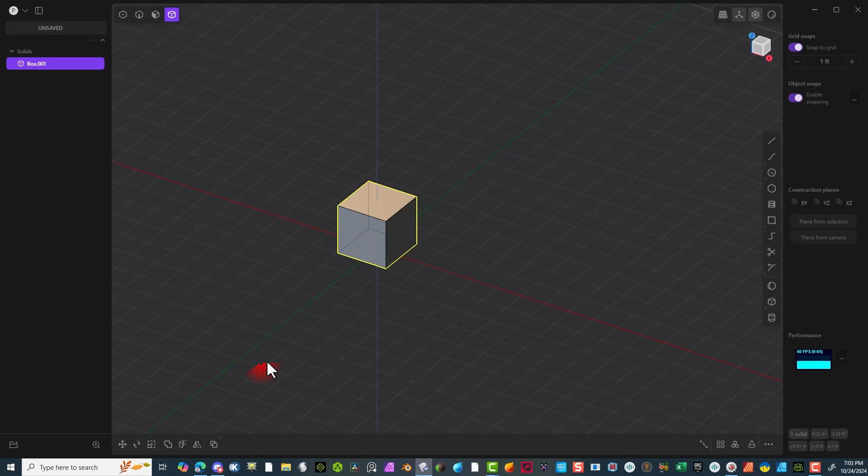First of all, I'm going to select this cube here and delete it. Don't need this. I'm going to start off with a circle. I'm going to bring this out, and we're going to snap it to 2. If you don't have it snapped on, that's fine. You can hit tab, then enter, and enter the 2. And that's basically what I start off with, 2 feet.

Then I'm going to extrude this upward. I'm going to hit the face selection tool and just bring this up. This I'm going to put on the snaps. I'm going to bring this up like 4 sections, basically. I'm going to hit the OK button to accept it.

Then I'm going to start working on the top piece here. Let me zoom in a little bit. I'm going to select the line tool, Shift plus D to make a copy of it. Then I'm going to bring this up, like 1 section, 1 snap, pull it up to the top here. I'm going to also hit G and bring it up with the Shift D. So I made a copy of this basically. Then I'm going to take the snaps off and bring it a little closer, almost halfway between the foot.

I'm going to select these 2 faces and hit the L key to loft them together. Then I'm going to actually scale this up with S and S. I'm going to go to the actual front view here, and bring this right down to the side here with the G key. Using the F key to hit the actual center of this object to bring it into the other object so it lines up properly. I'm going to bring it in a little bit farther so it's actually into this other object.

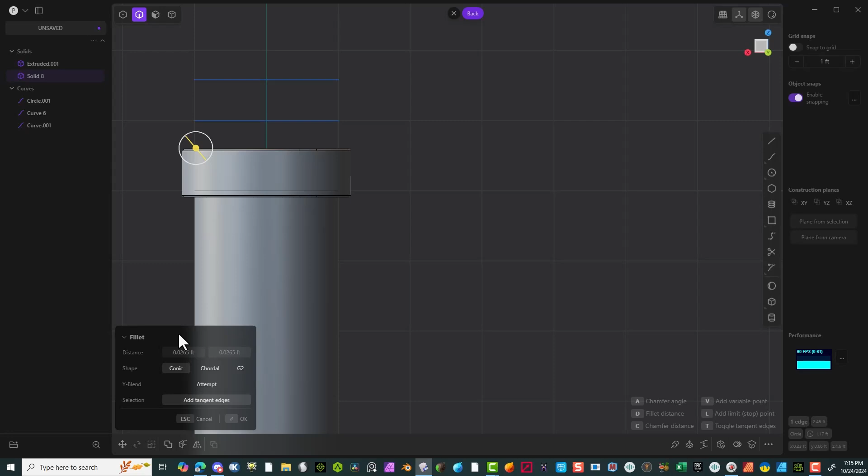Let's select this edge here and I'll pull this up with the fillet. Hit the OK button to accept. Same thing on the top here. Not too much, just enough to have a little bit of curvature. I'm going to cancel that and pull this a little bit more. I think it'd be nicer to have a smoother transition there. Like that would be good. Okay, hit the OK button.

Now I'm going to select these pieces around with the Alt key and the top piece. I'm hitting Shift D to make a copy of this. I use this to help add a little bit of a design on the top of this object. So I can select these 2 here with the line tool and delete those. Now that I have this here, I'm going to actually do some work on it.

I'm going to hit the actual circle, bring it out, something like about there. I want to cut the center of this out. So select this piece here and then hit the cutter, select it and cut. Hit OK. Now we can just delete that little piece there on the top. So that's done. Let's go and select the line tool now and delete that. There we go. Now I'm going to use this part here to make it look a little different.

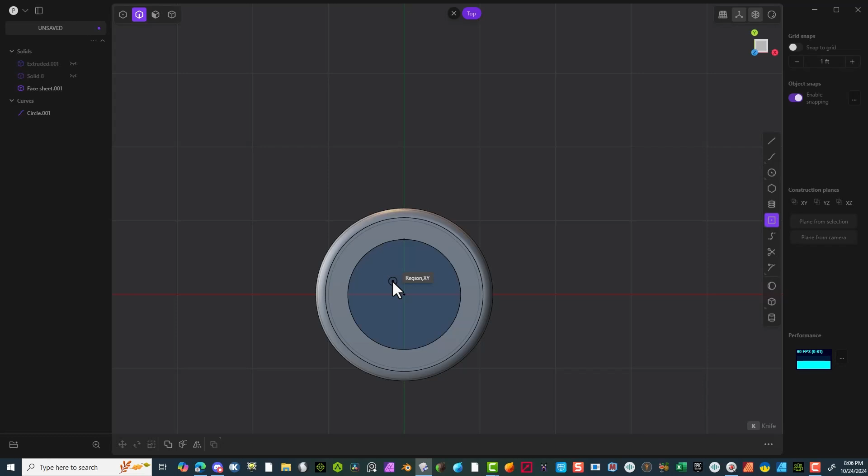Just to give some variations here. So go to the side view, now the top view. I decided to use the actual rectangle tool. Pull this out from the center out. I'm going to use this to help cut this section here. I'm going to make sure I hit the center of that area. I'm going to bring this down to like, I think around 3. That way I can get some variations of these parts.

So now I've done that, I'm going to select the actual object itself. And then when I use the cutter, I'm going to select each of these. There's basically 3 of them to select. And then hit the OK button. Cool.

Now we can actually select all these 6 sections here and delete them. And then I can select these lines with the line tool. Select each of these, and let's delete those.

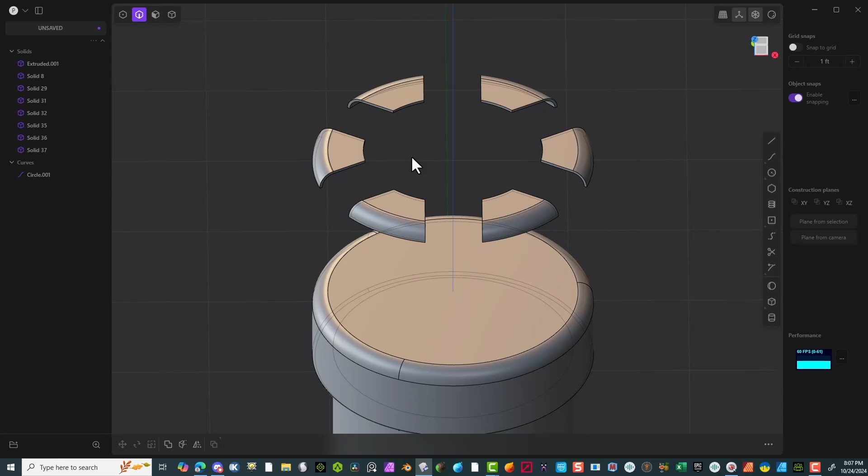Cool, so basically got 6 pieces. Now that I've got those cut out and formed, I'm going to bring these down with the G key. But first I'm going to create some smaller holes on top of each of these parts. I centered it on this part and brought it in. I'm going to scale this down a little bit, I think it's a little too big. I'm going to try to drive around 3 of these cylinders on each section.

To do that, I'm going to use a radial array and select the center here. Of course it's way too little, 3 here, but if I start bringing this up I get to a point where I actually have 3 per section. So I went with 36, that way each section has basically 3. And then I hit OK.

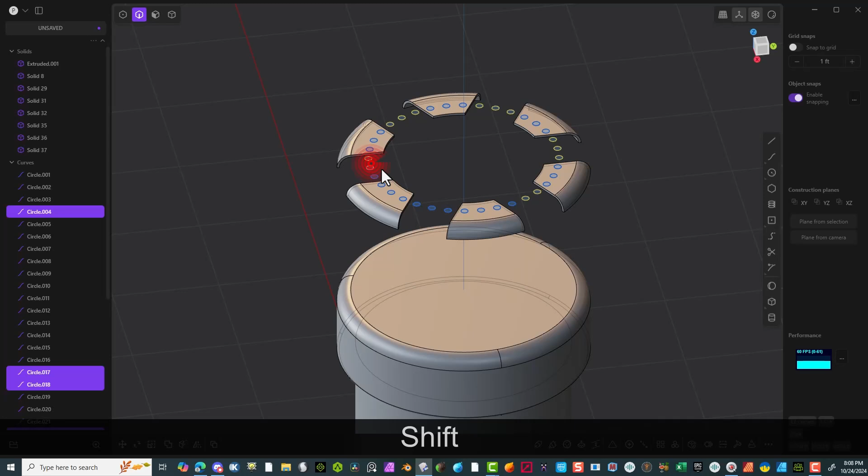Now I can go ahead and select these ones I don't need, holding the Shift key with the left mouse button, and just start selecting all these, trying to get away so I don't select other things. And these as well, and that one, and delete those. Just going to select these other ones here, delete those. And then you got one more on the side here, and delete. All right, cool.

So now I'm going to select each of these parts, and then start using the actual cutters. But first I'm going to select each of these sections, and pull out each one so I can cut straight out of these parts. So once I do that, hit the E key, and drive this downward, just like that. Hit OK.

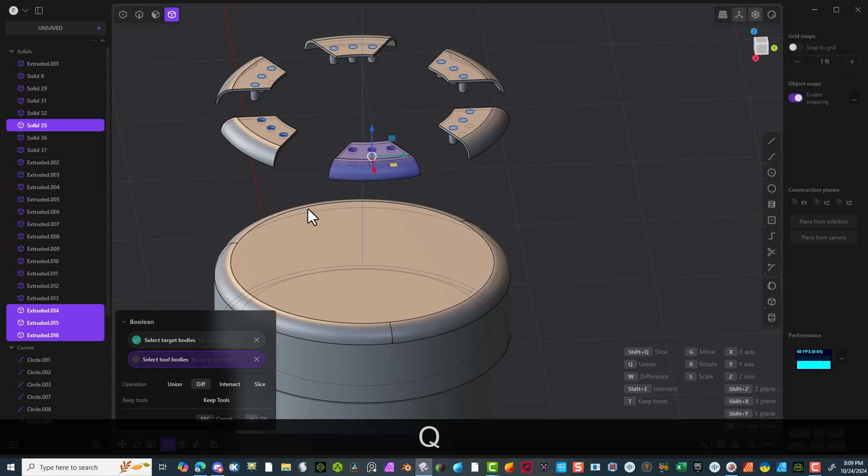And I select the object selection mode here. Select each of these, and then select the 3, and basically hit Q. We're going to do that for each of these sections here. So select the main section, the 3 cylinders, and hit Q, and keep going through the process all the way around each of these sections.

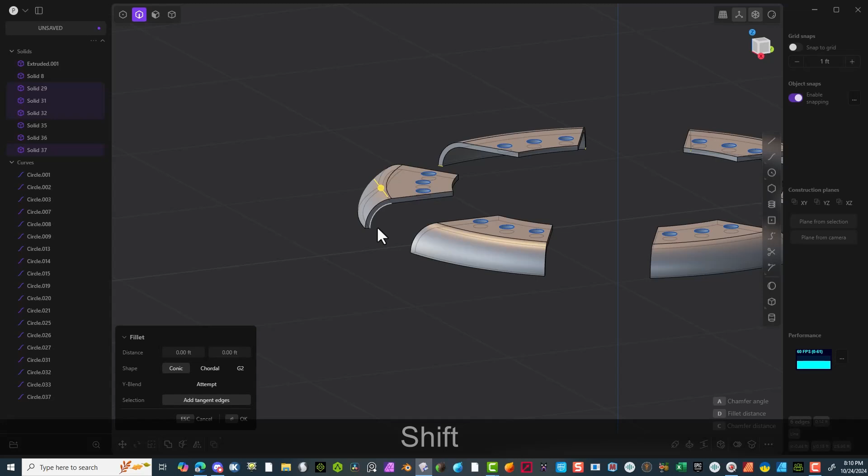First, I want to go in and add a little bit of fillet on each of these corners. So let's select each of these. There's basically 4 per section, each corner has an area I've got to add in a little bit of an edge there. So let's go and get each of these on the bottom first, just trying to focus on the bottom, and then I'll work on the top section as well.

All right, so I got all those selected now, and now would hit the top ones. Just trying to continue to focus and drive this changes where they are needed. So I never really want anything too sharp. Actually, in my modeling, I like to have a little bit of curvature on everything so it looks better and reads better. So I got those all selected.

I'm going to go ahead and pull on the yellow circle, just the fillet, and pull this out. One good thing about this program, it automatically has it set up for you in most cases. If it's not there, you just have to hit the B key.

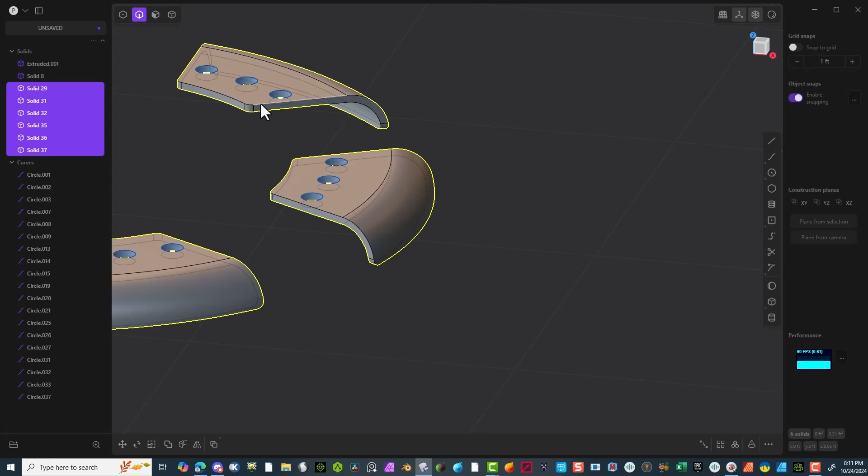All right, so now I'm going to select these lines like I did those other sections. I'm going to do each of these as well, so I'll go around the whole thing and select each of these sections. Let's select the bottom as well, so that way I could do one fillet for the whole thing. Let's make sure I get each of them.

And then let's pull it out, a little bit on the plus, like 0.004. Cool, all right, so now I got this selected, just going to bring those down into the space, and we're going to be a little bit above the existing part just to give some variation. Zoom in a little bit, see what it looks like. Yeah, I think that looks good.

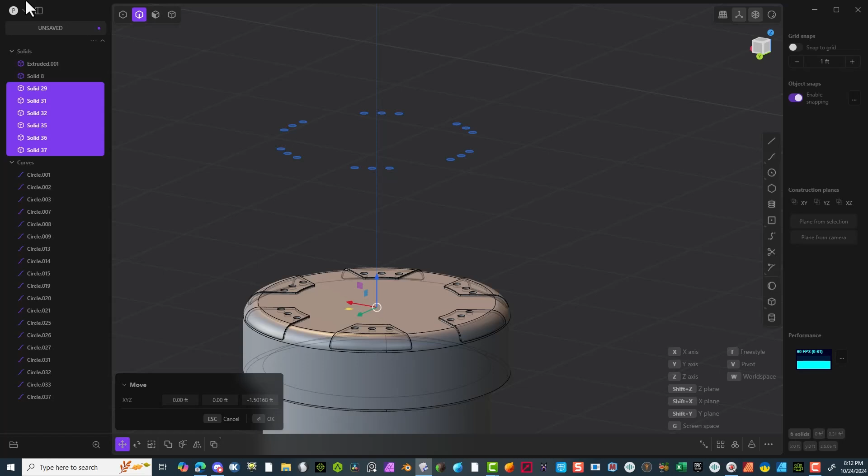I'm going to hit the OK button now and select these and delete them. Don't need those anymore.

Now I'm going to pull out a circle on the top here, and get it closer to the inner pieces. Basically creating a shape on the top. I'm going to hit Shift D on that and bring it up, and also scale this down with S.

I'm going to use the curvature spline tool and go to the side view to add a side rotated angle. But first I'm going to hide all this stuff so I can see what I'm doing.

Go to the side, select the top, point there, bring this down, and make sure I hit the tab key. The tab key will help drive this line so it looks better, it's easier to control. So let's bring it down and add a few more lines here.

Basically I'm going to do a revolve on this section here, just to give it some nice looks. I'll go a little bit out, then bring it back in, get a little closer, a little more control, and then back to the point. There we go.

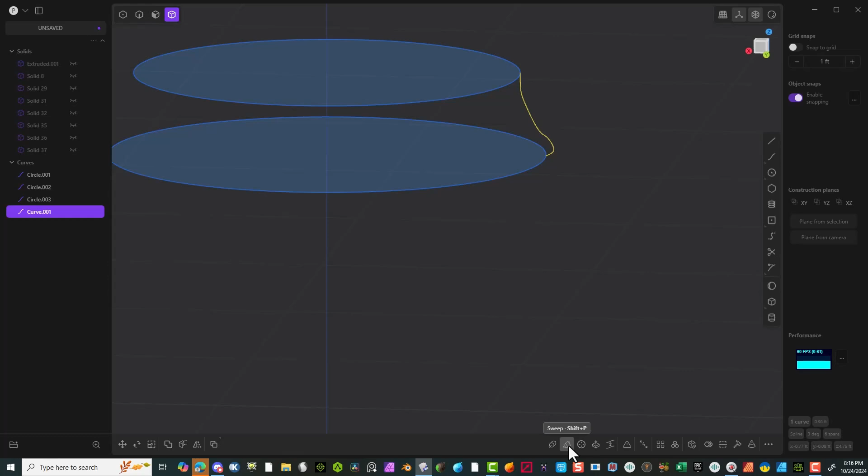Now it's really easy to go in there and select those points if you need to adjust anything. I'm good with the shape, so I'm going to hit the revolve, hit the very center of the space, and pull it upward, exactly straight up, so I get the shape I want.

I'm going to select this section here, the line, and delete it, and the one on the bottom. So we'll select the top line, hit the patch tool, hit OK, and the same on the bottom, hit the patch. All right, that's done.

Now we have an actual solid. We can pull this out a little bit with a fillet to make a nice rounded top piece, and now we can use the rectangle tool to pull this out.

All right, that looks good there. I'm actually going to do a fillet on these, take off the actual snaps, and of course add to the plus to make it rounded, something like that.

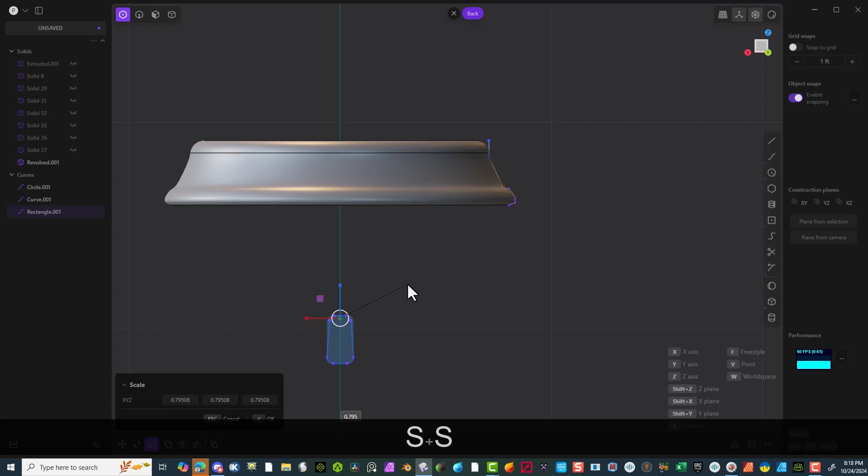Okay, I'm going to select these bottom sections and hit the G key and move it down with the blue arrow, then say OK. Then I'm going to take these sections on top and scale them in with the S key, just to give some different variations in the actual design.

Okay, select the line tool and move this up into the space, right about there. Then hit OK, and scale down a little bit so it fits better. Now it's in the center, so we're going to move this out. Again hit the G key and move it out. About right there looks good.

Hit the OK button, now select the face tool. I'm going to select that section there, and we're going to extrude this into the space, go all the way through. Now let's see. Let's select this line here and delete it.

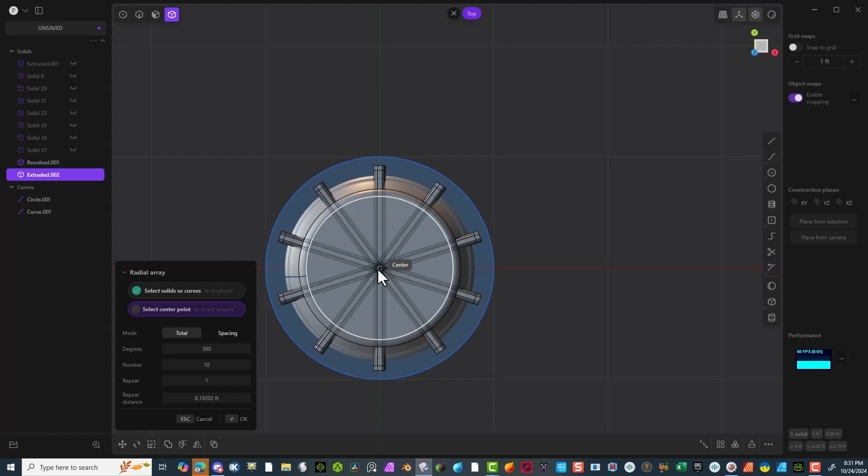All right, let's select this again. Top view, radial array. I'm going to go down to 5 sections, but it's actually really 10. Perfect.

Now select the main one and then these other sections here, and we're going to hit the Q key, then hit OK. That way it's nice and cut through.

All right, I'm on the top view now. I'm going to bring out a disk, right about there. I'm going to Shift D this and bring it up. Hit the OK button, of course. And we're going to select the 2 faces here and hit L for loft. Then hit OK, and just delete these 2 pieces, these 2 lines.

Now we can select the object and move it in, down into the space, then hit OK. Again hit Q, Shift Q, so I can combine them into one. Now I'm going to select the top piece and delete it, of course.

Select the line tool right here and basically do a fillet here. Hit OK, and then one right here as well.

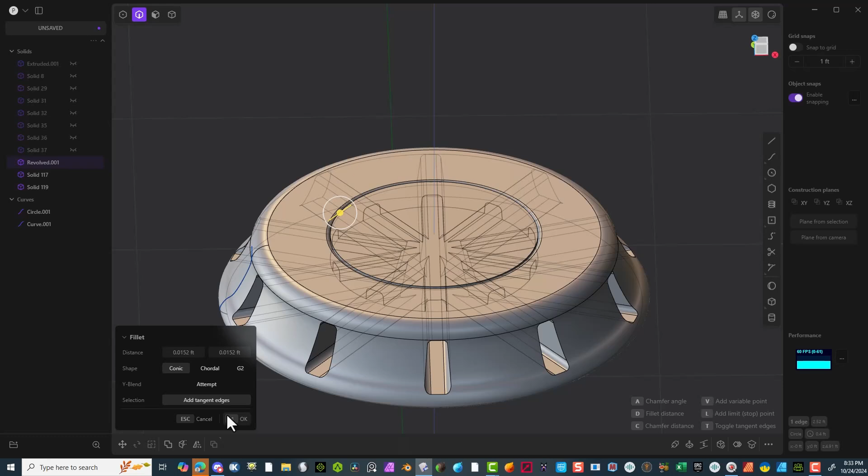Let's select the top here and actually pull it out with the E key upward, and then the line tool. And we'll do a fillet on that as well. Select each of these round sections here, all the way around. All right, last one. Great, now let's go and pull this out on the plus.

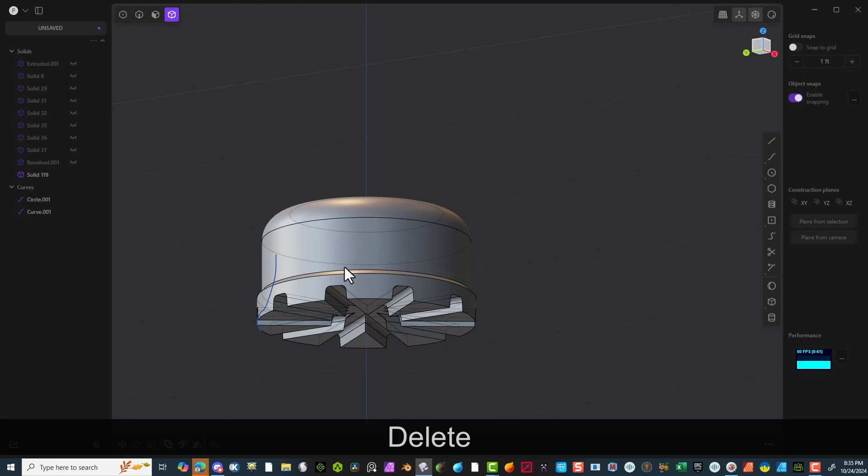Can't do a lot here because that line is so close. Just gonna type it in, 0.001. That took, so we're gonna hit the OK. Maybe we can hide that section here. And just gonna select this piece inside here. Hit the delete key, get rid of it. Now we're gonna unhide it again.

See how it looks. Go to the top here and select a disk again. Bring this out. Bring this down like that. Actually hit the edge of this. I'm going to create another disk to basically revolve around this section here. So click right on the edge there. Just bring this out a little bit. Use this to help cut into the space there, give it some variations here.

So select the actual face of that. Actually, I did a sweep on it to make it easier. So now I've done that, select the main object and then select the object and then hit the Q key to delete it. Just to give it some different looks here. Okay, we can select the line here and delete it now. Cool.

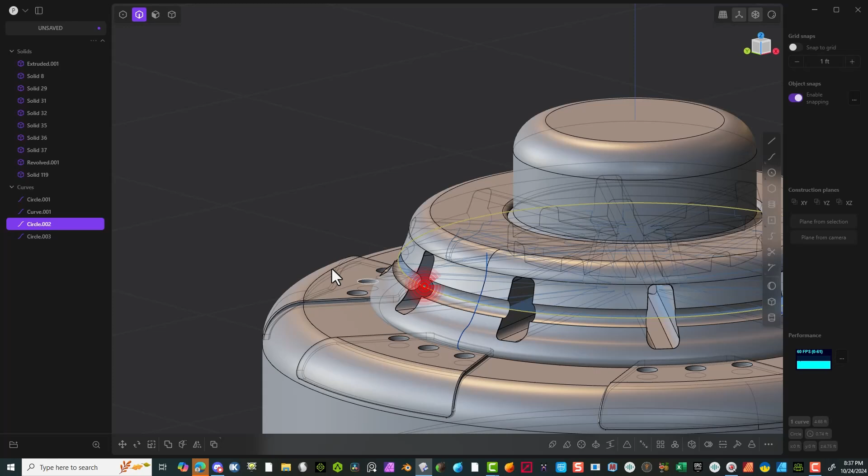I'm going to select each of these sections here that I just created. We'll give it basically a fillet on all these. Let's go around the whole thing. Make sure you cover all sections. So I didn't show the fillet on this one. It's 0.003 or 0.004. So basically I hid the rest of the actual object and now I'm just at the cylinder that we originally created at the beginning of this.

And what I'm going to do now is actually use the actual spiral lines here. So I'm going to select the center of this basically. And then I'm going to go to the side view here and I'm going to bring this down to, take out the snaps here, to about right about here. And I'm going to pull this out to about right about there. Now, one of the things I've done in here is I've added in a little bit more details, so on the turns like that.

And when I got finished with it, I reduced it down, but I think I'm just going to stay with it, to save some time here. I'm going to go down to like 4.22. I'm going to bring it up a little higher. Actually, I'm just going to bring this down a little bit. I don't want a lot here. Just a little bit of a turn on the top section here. And I'm good with that, 307.102, hit OK.

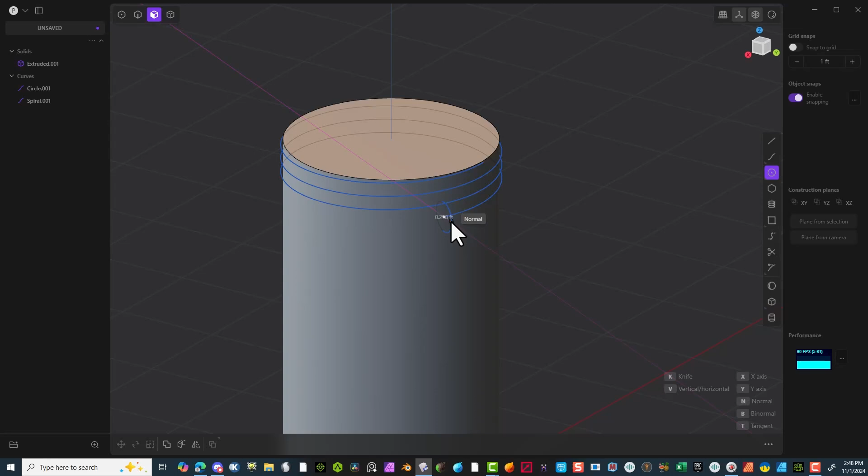And then what I could do from there is basically go around to the side. And where this little section here is, we can use that to drive the actual, just going to move this around a little bit. This is what I want to use, or this, whichever one is best. I'm going to go ahead and use the actual disk tool here. Pull this out just a little bit, not a lot. You could zoom in if you needed to. I'll do something basically like this.

Again, it has to go around and it can't hit itself. So I'm going to scale this down just a smidgen because it might actually hit each other around the turns. So I'll say okay. Now what we could do is hit this actual face and we can use the sweep and use this to sweep around. Again, like I said, if you get it too close, you hit each other with the top and bottom section, and that will stop you from being able to do this.

And just hit OK. Now to save some other time, I'm also going to go ahead and delete these sections here. And I'm going to select this edge and this edge here. I'm going to pull this out with a fillet on the plus. And again, I'm going to get real close to the end here so it's more rounded. Now, if you're having problems with it, just zoom in a little bit more. Make sure it's on the plus.

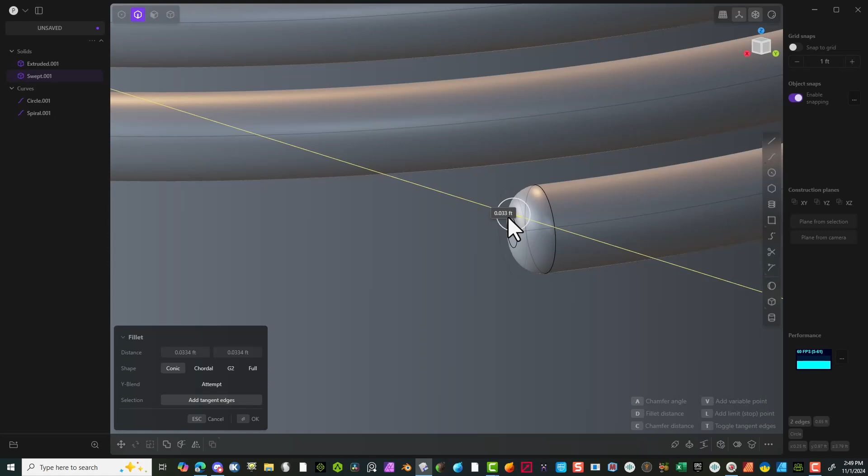I just want it nice and round on the tip here. Something like that would be good. Then hit OK. Now that we've done that, we can go in, select this, and then this, hit the Q key, and hit OK. Now we've actually deleted all the unneeded stuff. And then go back in and select this edge here with the Alt key, this one here, and we could pull this out. And we're going to do this on the plus.

So sometimes, again, you got to go a little closer. Let's just pull this out a little bit less. We don't want it too much, about 0.011. Hit OK. Yeah, and that's pretty much it for the ability to add in this rotated spiral. And when you actually hide it, it looks really nice. So that's simple for that kind of effect. Okay, let's continue.

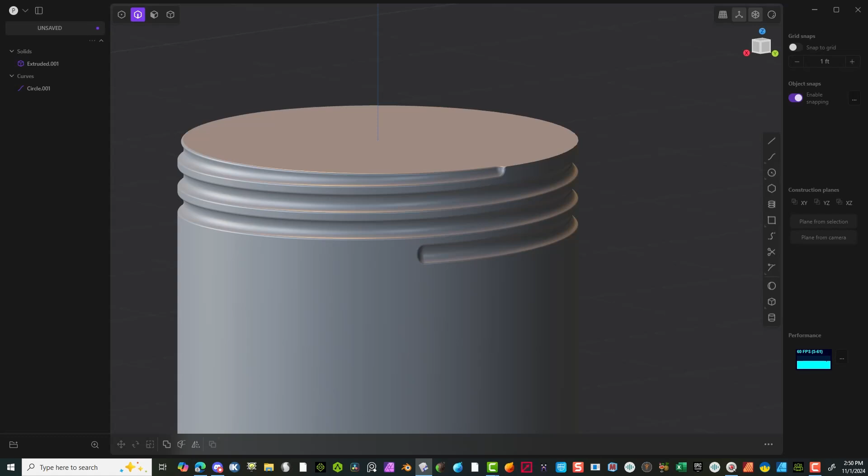All right, so I'm going to unhide the top piece now and kind of just modify this as needed. So we'll select the object selection and select the top section. And just adjust this a little bit. We'll scale it down a little bit. Hit the OK.

Okay, so I'm going to select the bottom section here on the very bottom and actually do a chamfer. So let's pull this out with an angle. Not too much, just a nice little edge there is what I'm trying to get at here. Cool. Hit the OK once you did that, and then go back to the actual line tool and just add in, again, a fillet on both of these edges to make it look nice and soft. Just like that. All right, that looks good. Cool. Hit the OK button to accept.

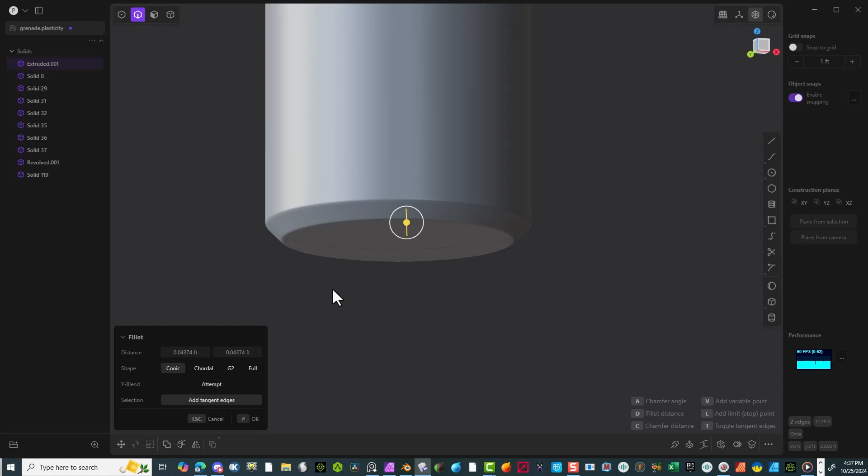All right, so I'm going to go ahead and select the rectangle selection or rectangle tool. And first of all, I'm going to actually add a line down the center of this object. So let's bring it down all the way through, just like that, right click. And then I'm going to actually select the rectangle with the center section in it. And I'm going to pull this out and make it a little bit wider. And again, I'm going to adjust this after I right click.

Now that I have it here, let's start adjusting this. So first of all, we're going to select the actual edges with the point selection. So select the point selection and select all 4 points. And I'm going to scale this up a little bit. Okay, cool. Now I'm going to actually select the face selection and push this out of the object from the side here. Just to see what I'm doing.

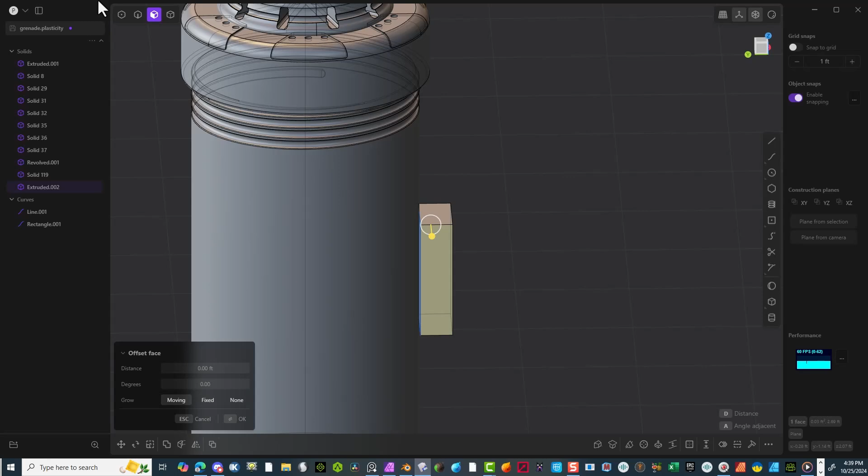I'm also going to adjust this now. So I'm going to make sure I have the edges shown. And I'm going to select the edges here, all 4 of these. And I want to make this more of a rounded edges basically. So let's pull this out on the plus. Just like that. Hit the OK. Cool. Now we select the line and select this edge here and just bring this out on the plus. So it's a nice fillet. Hit the OK. All right.

Now select the object and we're going to hit the G key and move this inward into the actual cylinder. Now we're going to select this section here and delete it with the delete key. And go to the side here. And we'll select the object selection. And I'm going to use the G key and move it up a little bit. Something like that. Hit the OK. Now let's Shift D and bring this one down. So now we have 2 of them.

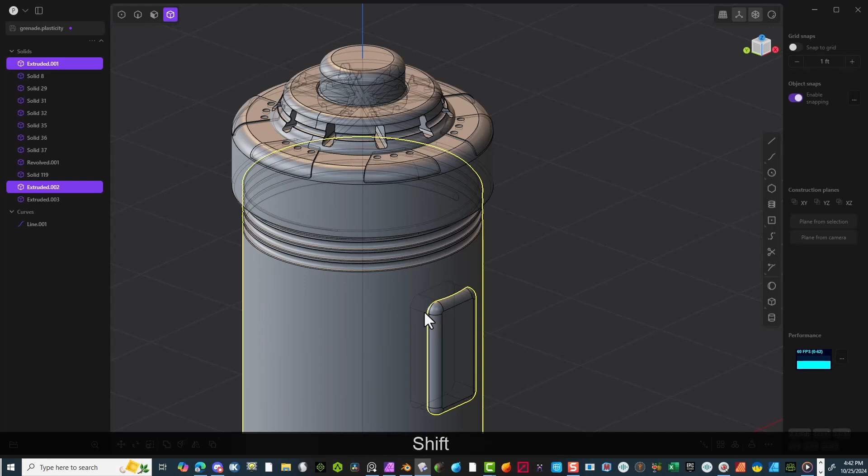So I ended up pushing this in just a little bit farther into the actual cylinder. I thought it looked better. And I'm going to hit the OK. Then I got both of those in here. Now I'm just going to test this out, see what this looks like. And I do a lot of testing just to see how things come out before I go throughout the whole thing and add a whole bunch more stuff. So I'm going to pull this out and see what this looks like. I kind of like the form. And I do a lot of unhiding of lines just to see how things are turning out. So now I've done this, I'm going to just cancel. I don't want this to be part of that.

So I went and did Control Z a couple times just to get back to where it was. And I decided to pull this out a little bit farther outward just to give it a little bit more room to breathe. So again, a lot of times you just undo things, Control Z, and just bring this out a little bit more. I want to get more of that edge to kind of help control that pull. And I just think this will be better. Hit the OK. All right, cool.

So now I'm going to do a radial array on this with the same thing with 8 and hit the OK. And we'll select the main cylinder first, and then I'm going to select the rest of these, hit Q, and then Q again, so that way they're all connected. And then I'm going to hit the lines on each of these connections all the way through. And again, fast forward this.

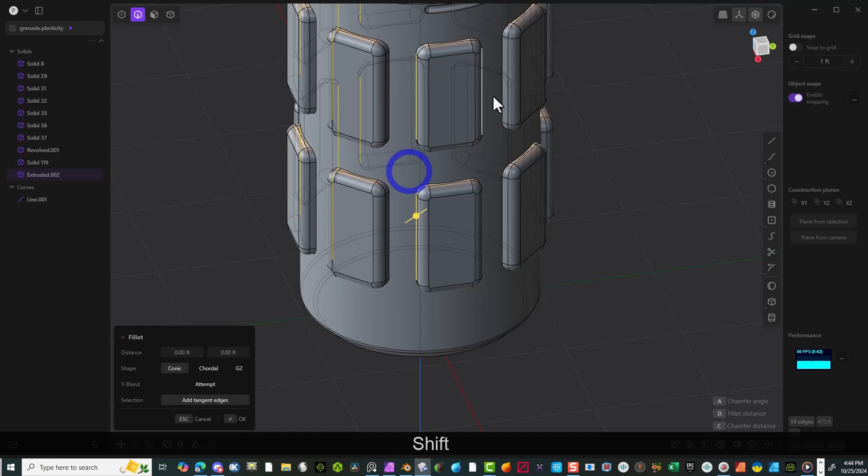All right, so I'm going to pull this on the plus, so we're actually going to have a nice fillet here. And again, I think I'm just going to pull it out enough so I have a nice separation there. I'm going to hit the OK with that. And I'm going to hide the lines to see what this looks like, just to see if I like what I see. I do like the actual forms. I think it looks nice. So I'm good with that.

So I'm going to select the circle selection, and I'm going to go down to the middle here and pull out a circle. And this is where I'm going to create a crazy 8 basically. So that's why I call it crazy 8. And then I'm going to create again a box right next to this with the point selection in the middle and bring it into the space here. Again, I could adjust this after I lay it down. So something like that. Then I'm going to hit the G key and move that down. Let's move that into the space like that. Cool.

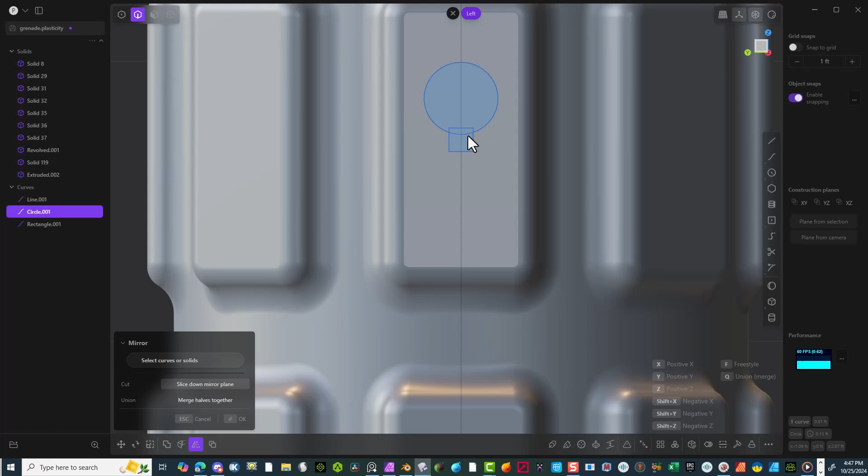Now we can select this and hit the mirror and select the center of this with the F key and just come out straight and then hit OK. All right, cool. Now I'm going to actually select the line here and this line here. And I'm going to hit Shift plus D to make a copy of it. And then I'm going to bring those 2 new lines out, just like that, hit OK. I'm going to go to each of these and scale this in. But first I'm going to pull these 2 out of the way.

And now I'll select this one and just basically go to the side view here. I'm going to S this inward so it gets smaller. Somewhere about there. Again, we could just type this in and copy this. We can actually add it to the other line. So Control C. So let's go to the line here and do the same thing. Go ahead and select it and go again to the front view here. And we can scale this down a little bit and then go back to the actual numbers here and just Control V in each of these. So you get that 0.79, just like that.

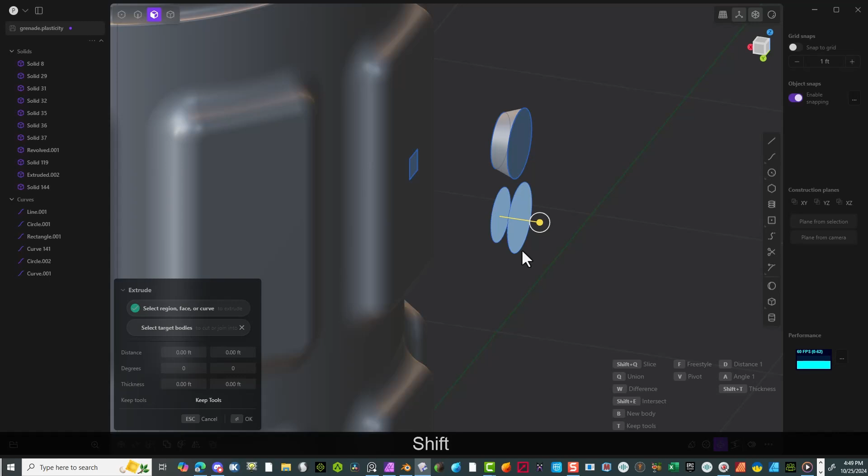All right, now I can hit the faces. So this one, and then hit L to loft. Hit the OK, and same thing with this one, L to loft. Right, and now we can select the lines here, all these, and we can delete those. And now select the object selection tool. First, we're going to actually do a fillet on these bottom pieces, so it's nicer when I cut into it. So let's pull this out a little bit, just like that. Hit OK. Now select the object selection, and we're going to bring those in. So use the move tool, and we're going to go right about there, into this section here. So hit the OK. We'll accept that.

I kind of want to copy and just bring this down. So I hit Shift D and just brought it down with the G key, with the F. And now I got all these done. I'm going to select all 4. And now I'm going to hit the radial array. So right there, again, hit the center. We're going to just stick with the 8 so that way they all line up properly. Just the squares for 8. Now I'm doing 8. Just keep the same setup, and that will actually make sure everything's centered.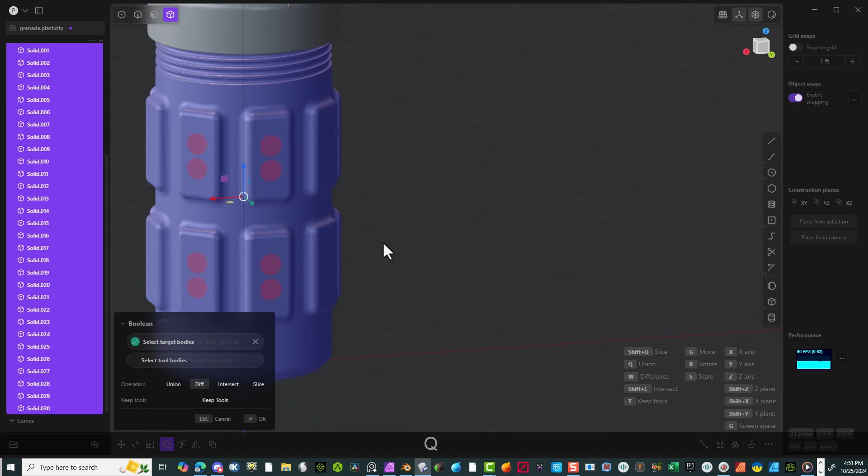Okay, so now we can select the main object. And we can select the other sections here. And again, we can hit the Q and select OK. It'll take a second to go through the process. That looks good. I think that came out nice. All right, now I got that little section there. I'm going to first go ahead and select all these sections around this whole thing. And again, fillet them all. So fast forward.

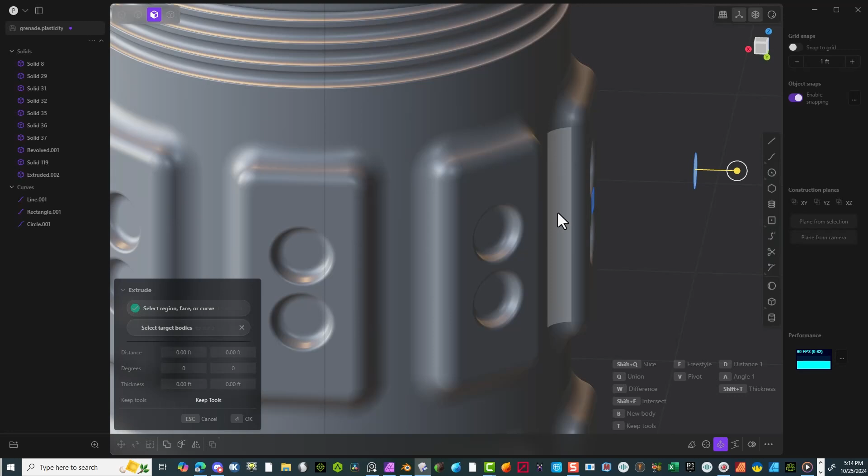So I'm going to now select the face selection tool, actually use the circle tool and pull this out right on that little section right there. I'm going to add some more detail into this part of the object here to give some interesting looks to it. So I got the circle here. I'm going to bring it out a little bit. And I'm going to actually hit the face tool here and extrude this out. Let's extrude it out like that. Hit OK.

Right now I can select this line here and basically delete it. And I'm going to pull this down with a chamfer. And I'm going to select this line here and this line and just kind of do a small fillet. Hit the OK. Now I'm going to select this section right here and do the actual.

First of all, I'm going to hit Shift D and I've got that face now. And I'm going to select the face selection and hit the E key to extrude into the space, just like that. All right, so now I'm going to select the main object there and the second object and hit the Q and then Shift Q, so that way I can manipulate this later. So go ahead and hit the OK.

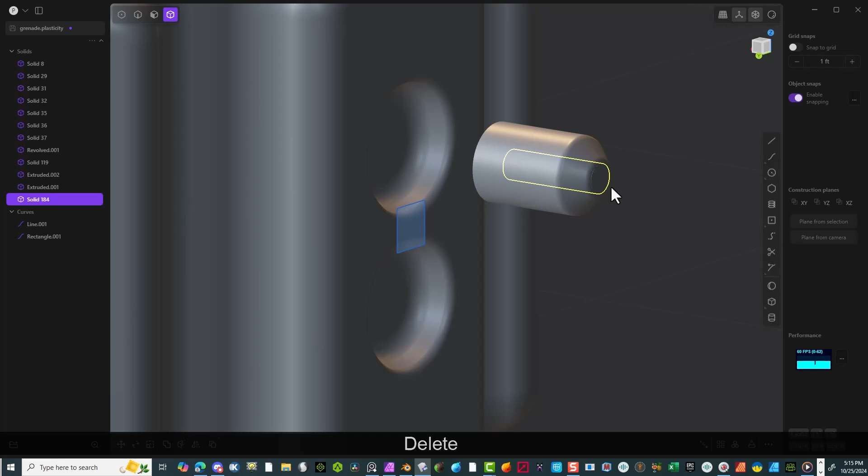And we could actually delete this piece right here, and this piece here, I could select the face here, the face selection, and just move that in a little bit, just like that. Cool. Hit OK. Now we can select the inner part here and just do a little bit of a fillet here. So let's pull this out a little bit. All right, that looks good. And same thing in here. We just did a chamfer in there.

So now I'm going to select these two sections here and hit the G key. I'm going to move them into the space, just like that. I'm going to do the mirror on those two sections right there and select the middle of this and pull it out. And basically use the F key to select that properly. Hit the OK. Okay, so now I got those selected.

Let's go and select these again. All four of these pieces. And we're going to put another copy down below. So let's go to the side view here, or front view. And again, hit Shift plus D. And then hit the F key in the center of that spot, and then hit the center of this spot and drop it. Hit the OK. Cool. Now we got those lined up.

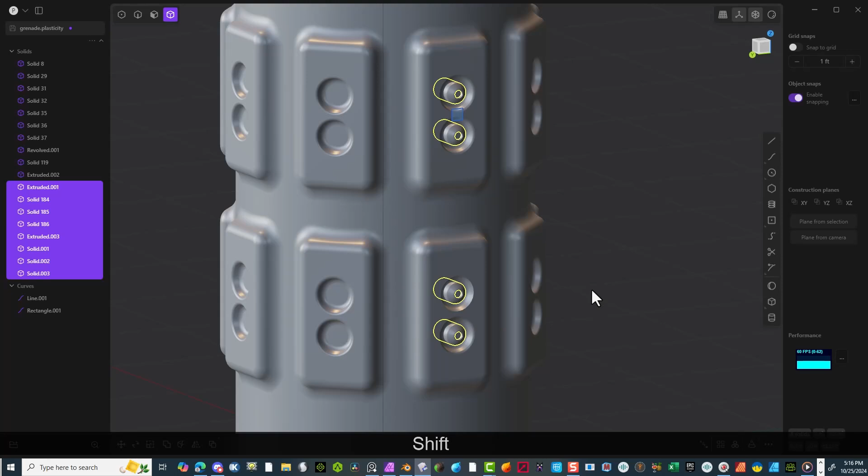Now we can hit all 8 parts. So let's go and select all 8 of them. And we're going to do a radial array on this as well. Same thing with 8. So go ahead and select the radial array and select the center up on top. And again, select 8 and accept.

All right, so now I'm going to select all of these parts and I'm going to cut into the existing object. So keep going around and select everything. Okay, now that I got these all selected, let's hit the Q and keep tool. So that way we don't delete it. And once it's done thinking, hit the OK button.

All right, so now that's done, I'm going to go ahead and hide all these sections that I just put in here. And to do that, I'm just going to select the whole thing on the bottom here, and then Control select the main cylinder to make this easier. And then I'm going to also Control G all this to its own group. So that way it's just easier down the line to select things and unselect things. So I put everything into its own group. So now this is going to be much easier to go in and modify some of this.

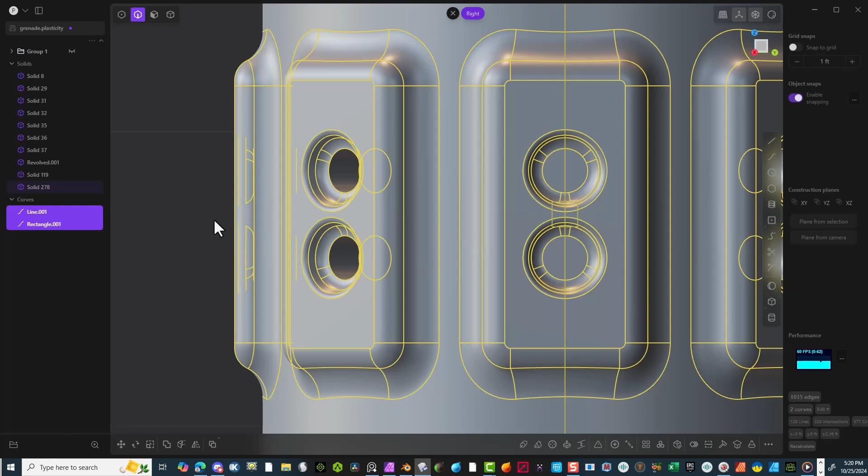So I'm going to select all the lines here and just hit the B key so I could do a fillet on this. And again, it's only going to select the ones that are hard edged because the other ones have all been done already. So I'm just going to select this and kind of just move this out a little bit just to give it a little bit more of a nice smooth edge with a fillet. It's going to be on a plus. Something like that, 0.00155. And hit OK. Cool.

All right, so now I'm going to go back to that little rectangle that I created earlier. I'm going to pull this up a little higher. I'm going to kind of cut into this section to add a little bit of variation as well. So now I kind of pull that out a little bit. I'm going to hit the face selection tool and select it and pull it through. Hit the OK. And now I'm going to modify the edges of these things.

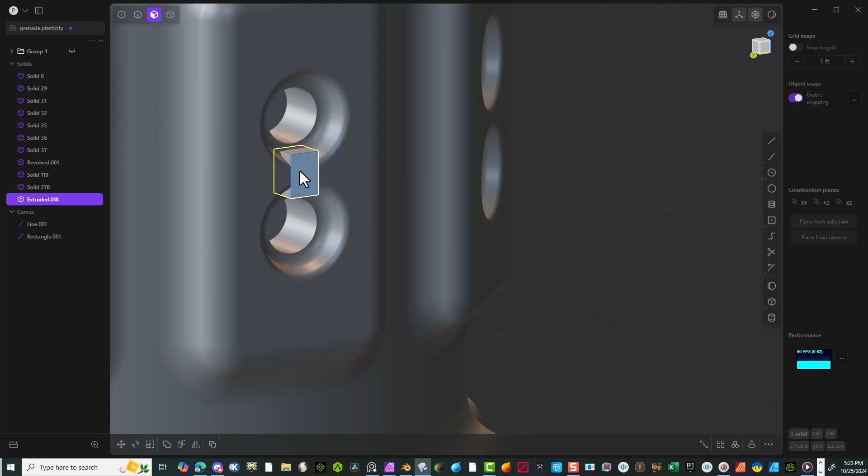So let's first select this and delete it. And then let's go and pull the edges out a little bit, just to give it a little bit more roundness into the part. So just get a little closer. I'm going to select all 4 sides here. And there we go. Now let's go pull this out on the plus. And that looks good.

Let's go ahead and hit the OK. And let's pull this out just a little bit to make sure that we cut that through properly. All right, so now we got the shape that we like. We're going to go ahead and hit the Shift D, and we're going to also copy this and bring it down. So hit the G key and hit the F. Again, select the center of that and bring it down to the center of this. Okay, now we got those two actual sections selected.

Let's go ahead and do the radial array again. So again, we're going to stick with the 8. So select it, hit the top portion right there, and hit the OK button. Cool. Now select the main cylinder again, and we're going to hit the Shift key and hold it down to get all those objects, and then we're going to hit the Q key and then Shift Q, so that way we can actually modify this as we need it. So again, we're going to first make sure we got this selected, hit the Q, and then the Shift Q.

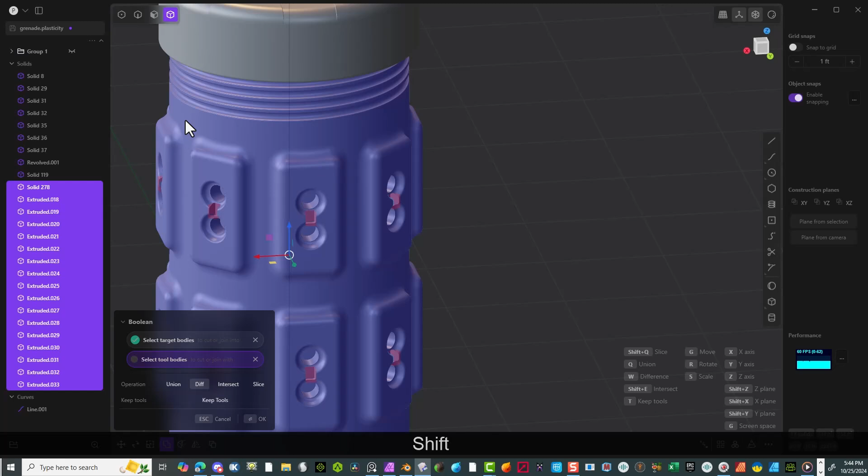And that way the object is kind of cut into it. And now we can go in and just select each of those little sections that we created. So let's go and select all of these. So basically we have 16 of these as a total. And we're going to go all the way around and select all of them. And we're going to basically delete these once we select them. So keep going all the way around until you got them all selected. Always delete half of them first and then keep going around. Okay, so got all these now, hit delete.

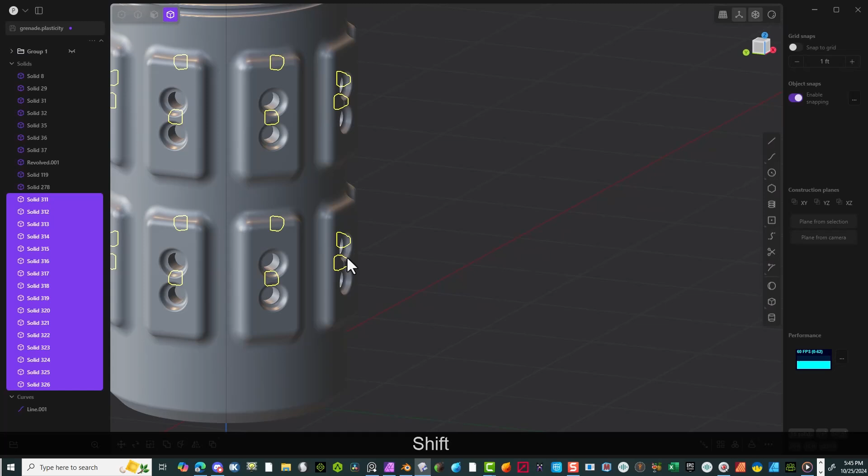There we go. Now we still got the cut into this space, which is great. And we can actually do a little bit of modification. So here I can select these two, and then select the rest of these, basically. Again, I'm going to go all the way around this object, get all these selected again. All right, got them all selected. Now I'm going to hit the Control G, and I'm going to put this in its own group. So this way I can go in and also add in another fillet on these things.

So let's go select each of these now that we got everything else hidden. I'm going to actually hit the whole thing. I want to make sure it actually gets everything. So I'm going to select both sides, the top and the bottom. And I'm going to do that through each one of these. So I'm going to fast forward as I select everything. All right, so now I got this all selected. Just going to pull this out on the plus to get a nice smooth round fillet, about right about there, 0.00335. And I got them all selected. All right, cool. That's it for that.

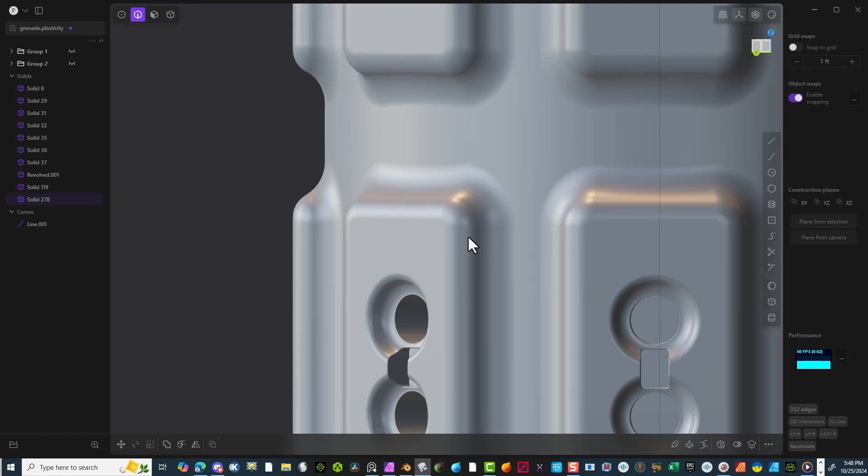So now I'm going to unhide these other parts here. So let's go back to group 1 and do an Alt H and just unhide all those. And that looks really good. I like the way this looks. And again, there's little sections here. I can just change the color of them so they stand out, basically. All right, so I'm actually bringing out a disc, and I'm going to start from the bottom here. I want to make sure I hit the center of this and pull it out. And I'm going to add in some more thickness to the bottom here. This is what my goal is. So I actually did a Shift D to bring that up.

And I'm going to hit both of these faces, and I'm going to extrude those together with a loft. So hit L and hit OK. Now we can select these lines and just basically delete those. Cool. Now let's pull this out with a chamfer. And I want it to get close to the edge of the bottom there. And go ahead and hit OK. And at the very bottom, I'm going to pull this out with a fillet.

All right. So now I'm going to use the face tool and pull this out a little bit farther. I want to make it a little bit thicker and hit the OK. Now we could select the line and pull this out with a fillet, so it's nice and smooth. Hit OK. Now we're going to select this object with the object selection and this object. And we're going to merge these together with the Q and hit the OK button.

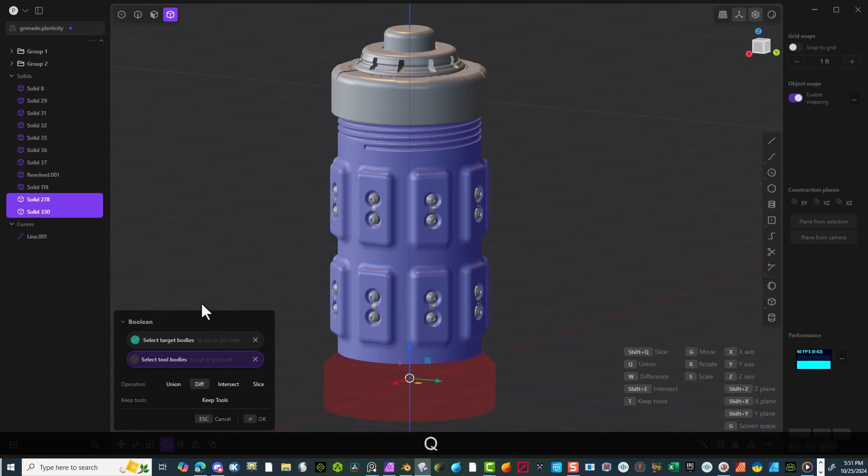That's one great thing about this program - you could always add stuff and take stuff away. It's really helpful. I'm going to select this inner piece here and pull this out.

With a fillet again so it's smooth. All right, so what I want to do here is pull this out a little bit, and this section here as well, so it gives it some separation between each other.

And again, this one was with a chamfer, and also over at the bottom here as well. I'm going to select this with the Alt key and delete this, and let's try this again just to make it look a little bit better.

I'll pull this out with a chamfer as well, so it has some more depth to it. Just want to see if that looks better.

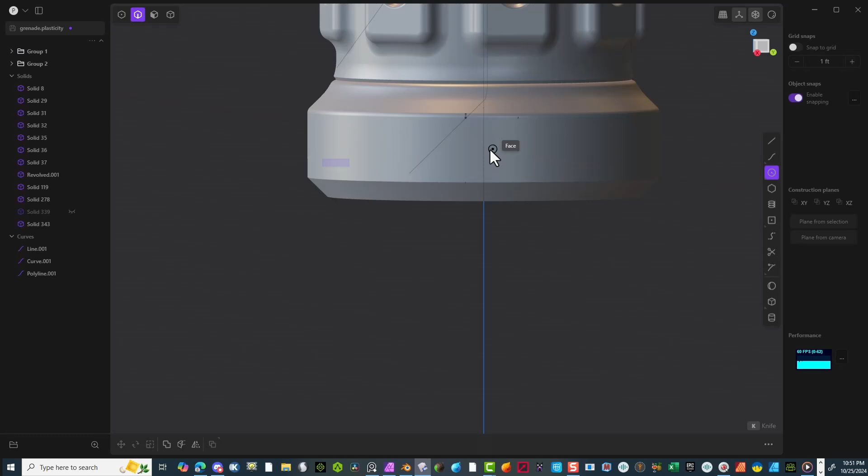All right, so now I'm going to select the actual circle tool again, and go to the front view here. I'm going to use that to start bringing out another section down at the bottom here, so I'm going to pull this out to about there. Then I'm going to use the line tool to connect to the very center of those spaces.

I'm also going to trim that piece there and make sure I select the edge again, hit OK. I want to extrude that basically, so pull this down straight like that. That's going to help us set this all up.

I'm going to use the line here just to follow that now, and back and then over to there, and then right click. Now that I got both of these sections laid out, I can hit the trim tool and cut that inner piece there. I can select this whole thing now, but let's go ahead and delete this line here too, because that's in the way. So delete that. Awesome. Now we can select this face and push it through into the space and hit OK.

All right, so now we select the line tool and pull this out. Let's select those two and we're going to pull it on the plus - I think that looks nicer. I'm going to select this piece here as part of the actual object in the front, and let's delete that.

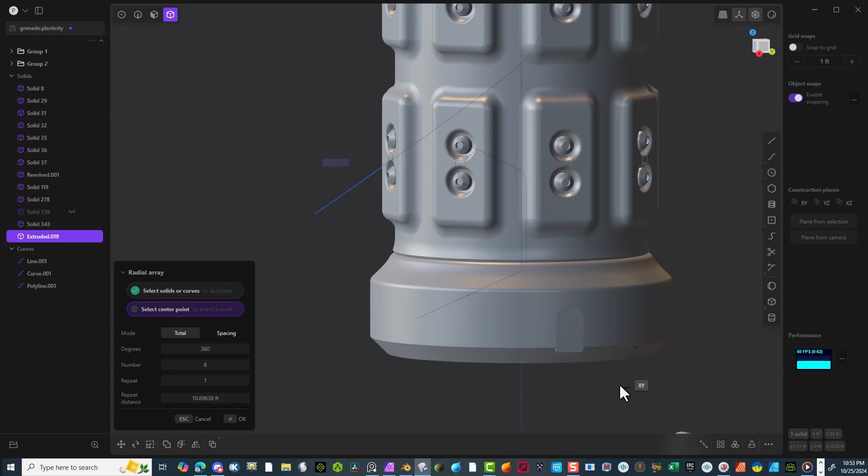Now I'm actually going to use the radial array and we're going to take it from the top, and we went with 8 basically. Get back to the front view here. So we're also going to add some more detail here to the center of this piece - we're going to bring that up a little bit.

And again, select the center here, bring it out, let go. I'm also going to select the points - let's select those two top ones. We're going to hit the B key for a fillet there and hit OK. So let's select the face here and pull this out just like that, hit OK.

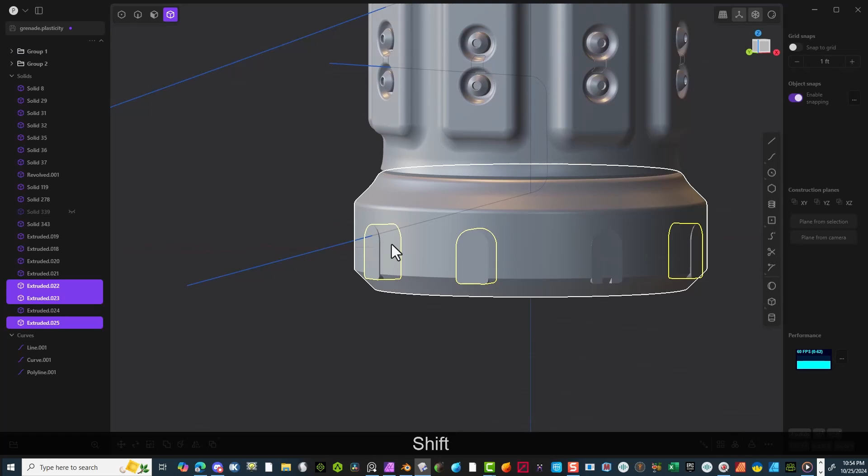So select this, select that, and we're going to hit the Q. I'm going to go ahead and delete these pieces here, so I'm going to use the one piece to drive all these. So select all these except for the one and delete them.

Now we can go back here and let's go ahead and do a radial array of this piece so we can use that for the control of this whole thing. Again, select them all, but first select the base, and we're going to use the Q key.

Basically what we've done here is cut out a piece of that so we don't have to worry about it - it's going to stay in the spot after we delete. So now hit the Q key, and there we go. It's a pretty easy way to make different shapes that are kind of complicated.

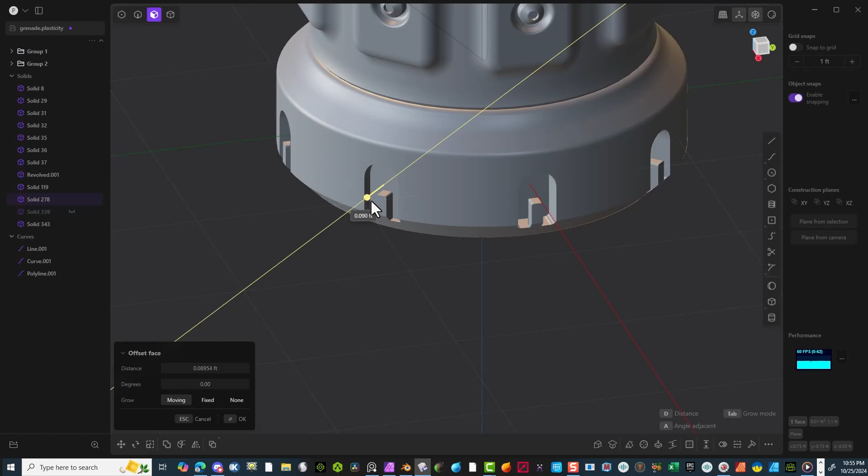So now we're going to select this and bring this in a little bit. I'm going to Control C this so I can copy the distance, and I'm going to go around and do all these. So I'm going to fast forward this part as well.

So in this part, I'm going to show you how to basically change the top of something, like you want to take away some of this spiral section here. It's real simple to do, so let me show you how this works. You could bring a line across the bottom of this, and we can go in here and just cut this with the cutter. And there we go.

So that's cut. Now what we could do is actually take part of this and reduce it as well, so let's go and select it. I'm going to bring another line up with the G key, and try to line it up where I think it would be the best place to cut it. So somewhere about there - yeah, about right there. I want to cut this right down the center of this, basically, maybe a little bit higher. I just want a little bit of the form on the bottom of this cap.

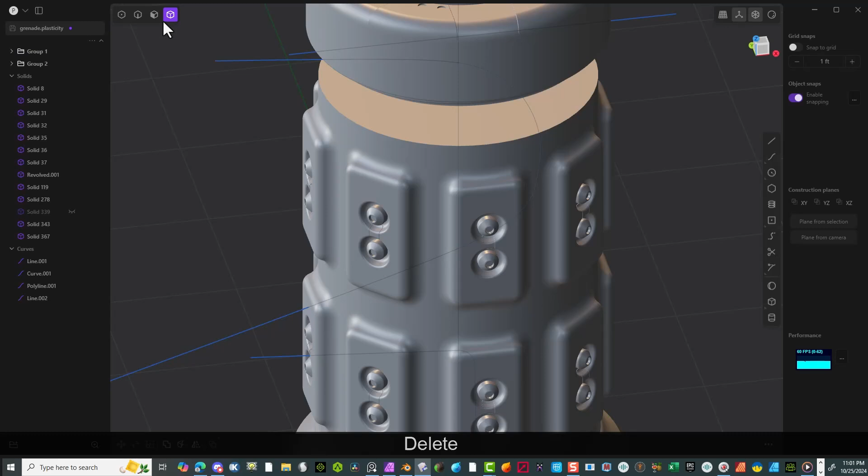So that way it looks like it's screwed on. I don't want it to have so much of a thread, so I'm going to select this and use the cutter to cut this out. Now we got that piece cut right there. We can delete that, and take this piece and hit extrude to bring it right into the other object. This way we can join them together and it becomes one.

It's very simple to modify things as you need them. I'm just trying to have a little bit of a curvature there, not a lot. You got to play around with this a little bit to get the look that you want. So hit OK once you're satisfied, select these two pieces again, hit the Q, and hit OK.

That's simple enough. All right, so let's start creating the handle. I'm going to use the line tool to start off on the left side of the center of that grenade and bring it out, add a couple different angles. I could adjust these as I need to. I'm just trying to get a good understanding of the position of the line, thinking about right about here. I can always adjust later on.

Now I'm going to take these two points and do a fillet on them to make them more rounded, using the B key to do that. Now I select the line and do a Shift D to copy it and bring it out. Again, I'm just making it easier so I can create the actual handle itself.

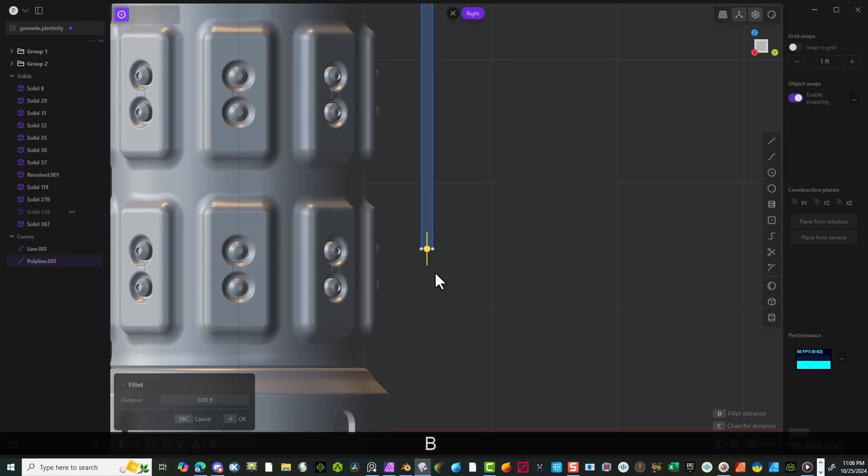So again, on the plus, same with this one here, just a little bit. All right, so now I got the shape that I really like.

I'm going to use the face tool to pull this out, so extrude it to a certain area there. Again, we'll select the line section and delete that now. I'll go to the other side view, select the object, and move it with the G key and the F key for the center, and place this on the center.

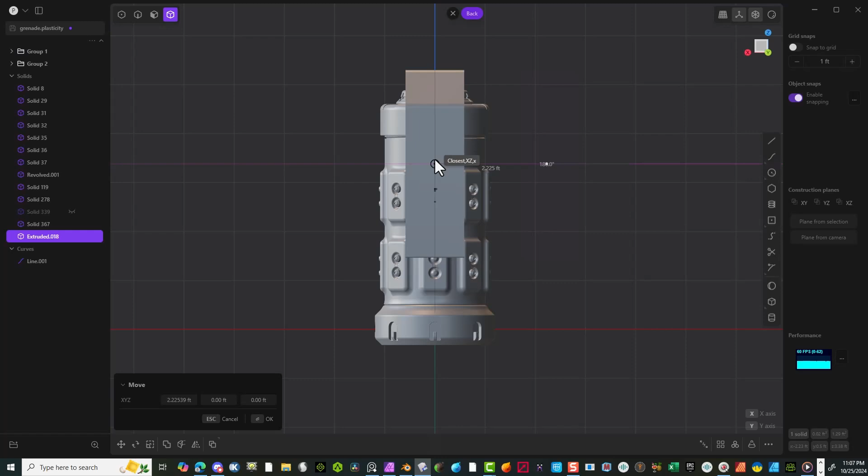This makes it easier to line things up. That did not work out, let's do it again. G key, F, gotta make sure I'm on the center of this object here. If you're having problems with this, you could always move the object off to the side, and it makes it easier to make sure you line it up properly. So again, G key, F, now we got the center, and now we can select the center here. That's the easiest way to line things up sometimes. Hit OK. Cool.

All right, so I went to the top view, and now I'm going to do some cuts on this, basically pulling this out straight ahead, and then at an angle, and pull this back up a little bit more, just to give it some different shapes. About right there, yeah, I think that looks good right there. And then pull it out again, and then up, and then all the way through.

And I'm going to mirror this to the other side now. Here's the mirror line, hit OK. And now select the object, and we're going to use the cutter, so we can cut those two lines out of that section there, and now delete these outer pieces. This looks a lot better that way. Real simple to do.

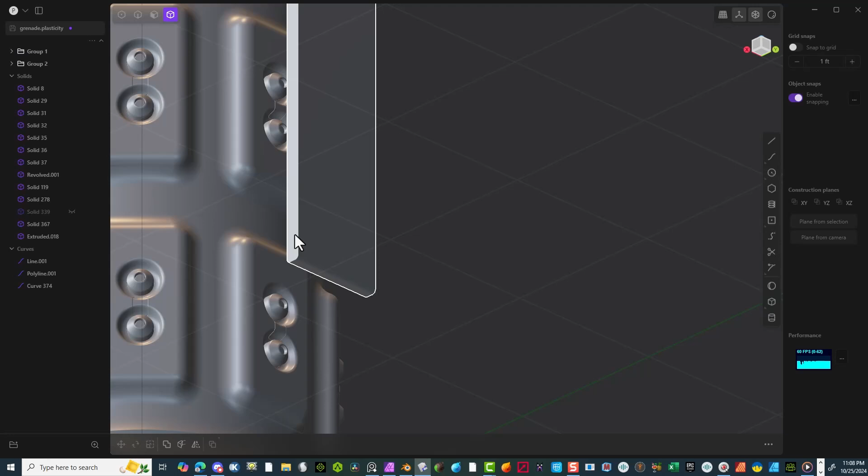So what I'm going to do here is take off the actual bevel on this. I want to adjust the edge first, so select both of them and delete them. I'm going to select these two edges first and adjust those, I just think it would look better this way. Select these two, pull this out as a chamfer, hit OK. I think that looks a lot better.

And then I'm going to select these four sections here, and again use the B key to create a fillet with the plus.

Now I'm going to use the line tool and actually cut out little sections of this handle. I'll bring this over to the side here and get a nice little beveled edge, kind of like a nice little cut. I'm trying to line this up so it's similar to the other side, and now we connect it.

First there. Okay, cool. Now that I got that, I can go in and adjust these lines. Let's straighten this up a little bit, make sure it's actually level with the other line. Then hit OK.

And then again, I could adjust this a little bit as well with the G key, and about right there. Again, it doesn't have to be perfect, it just needs to be clean.

So I'm just going to select these two points here, and again hit the B key. We're going to make this a little bit more rounded, just like that. Hit OK.

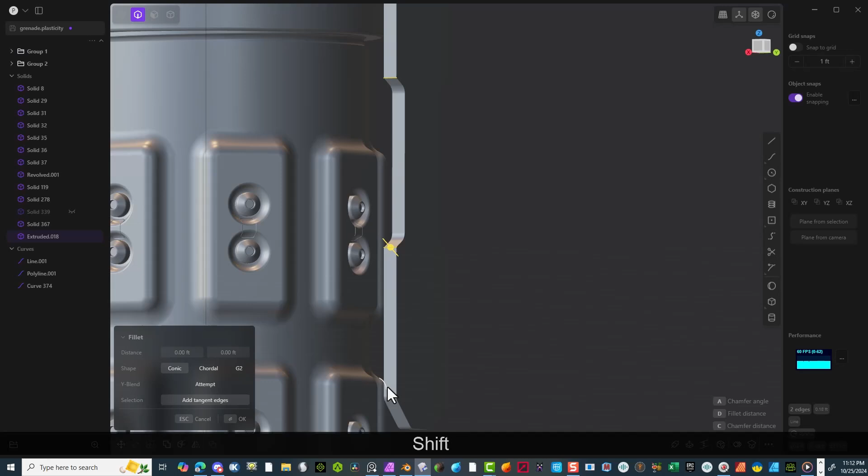I'm going to select the line tool and start cleaning up the edges here a little bit. I'll select all four of these sections here, making sure I get the right ones, and these two on the side here. Again, we're going to pull this out with a fillet on the plus. While we're here, I might as well do these as well on the top. Go around and select everything I need.

It would be easier if I had the line shown so I could select these easier, but anyway. Alright, so we got that one right there still, we got all those. Okay, so we got them all. Now let's go ahead and pull this out, again with the fillet on the plus. Hit OK.

So I'm going to bring this in a little bit closer to the center. Hit OK, I think that reads better that way.

Okay, now I'm going to select the actual rectangle tool and pull out a piece here. I'm going to cut out a section here. So again, put that out, and I'm good with that. I'm going to redo this a little bit.

I'm going to actually bring out a line here, and I'm going to cut it in a little bit just to follow the existing shape, give it some variation of look here. And bring it down. Again, I'm going to cut it back inward, about there, and then back to the center. I think that looks good.

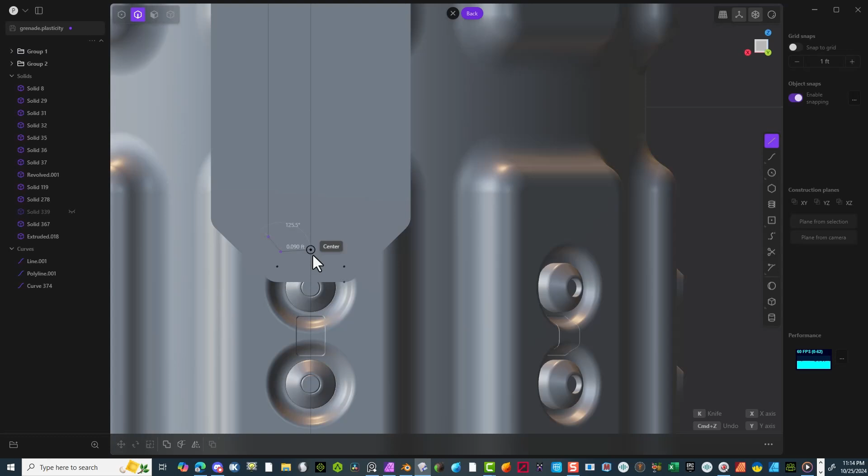Let's zoom in a little bit here to straighten this up. Great. And then I'm going to mirror this over to the other side. So hit the mirror.

First select the actual line and use the F key to bring it down, and make sure it's straight. Just like that. Great, hit OK.

Now we take these two lines and use the J key to combine them together. And now we select these points, all of them, except for the ones in the center. Don't need those selected.

Let's pull this out on plus, give it some nice smoothness around that. Now I can actually use the face tool, select it, and pull this through all the way through the actual handle. Hit OK.

Now we can select the handle with the object selection and select this piece. This time I'm going to use the Q and then Shift Q, because that way I'm going to keep the part inside. So let's take this piece on the outside and delete it, and this piece and delete it. Now I got the inner piece, this will be a separate object within the object, which is my goal here.

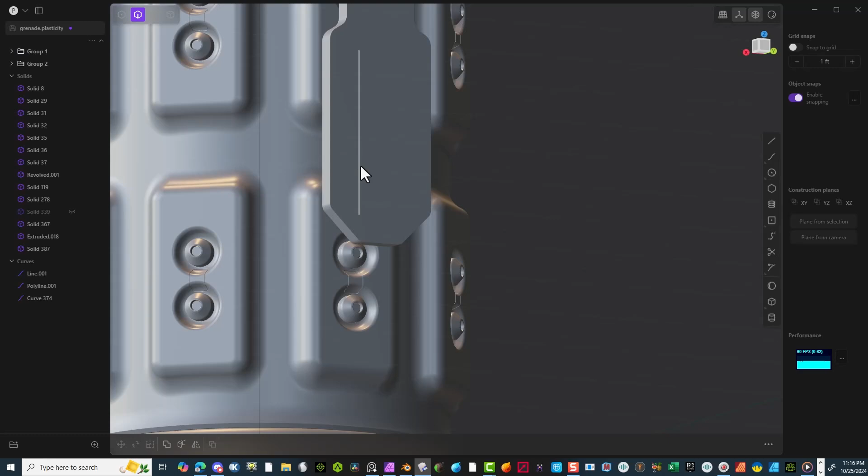Now I select the line here and actually do a fillet. So let's pull this out so it looks nicer, and it actually defines the piece. So again, a little bit on the plus here. Not a lot, just a little bit. And I think that looks good.

And same on the other side. Again, on the plus to make it look nicer. Okay, hit OK. All right, so that's it for that piece. All right, so now we can actually select the edge of this handle, and we're going to actually add in a fillet on both sides. So select both sides. Let's pull this out on the plus, so it's a nice smooth roundness.

All right, so now I'm going to select the face on the top here and just pull this up. I'm trying to kind of break this up a little bit so it has a different form. And I'm going to hit OK. I'm going to select the line tool here and select the center of this little piece here and pull this out on the plus. Not too much, just about there. And I think that looks good.

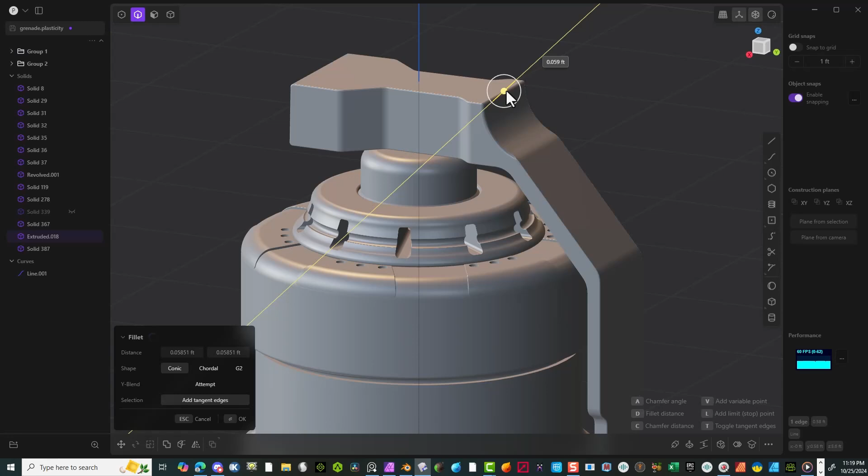And also on this edge here, I'm not going to be able to do the edge here because I have the fillet around the shape. So what I need to do, cancel, is I need to select this edge. And actually, I'm just going to go ahead and actually cut this out. So I'm going to use the line tool and bring this across and use that cutter. But first I'm going to actually make this more rounded here. So select this point, pull it out with a plus, and hit OK.

And I can use that to cut this piece out. So go ahead and select the object selection and the cutter, and select the line and hit OK. And then we delete that piece on the top there. Now we can select this little edge here and just pull this out on the plus. So we got a nice round form there. Great. Now I probably should have not put the fillets on the edges on the whole handle, because then it's going to be complicated to reconnect them all together again. But just something to think about before you go too far on something.

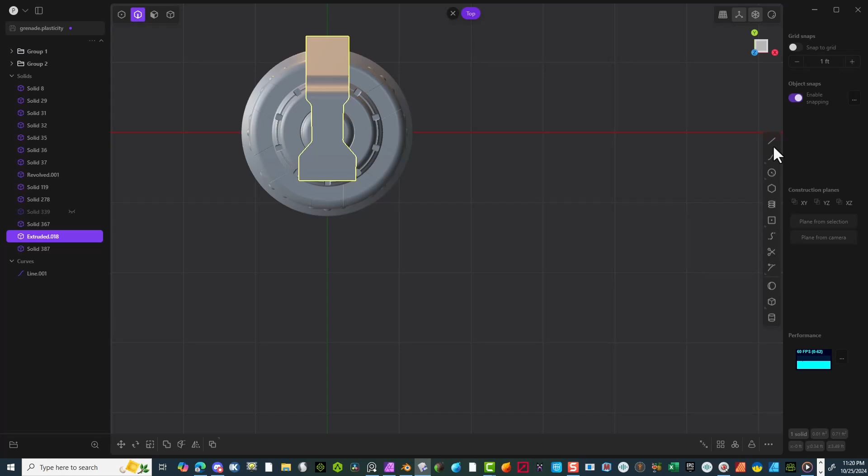All right, so now I'm going to the top view. I'm going to do some more cutting. So I'm going to use the line tool again, and I'm going to pull out a line over here. I'm just trying to give some variations of the shapes. So again, bring it out straight or to the side a little bit. Just make it more centered here. Now zoom in, get the right angle.

And again, we can use the mirror tool here. Make sure you get the line selected with the F key, bring it out. Select both sections here and join them with the J key. And again, we can select these points now, all 4 of them, and then hit the B key. We can pull this out on the plus, just like that, and then hit the OK button.

Cool. Now we can select the handle itself, right there with the object selection, and now we got that selected. Hit the line, hit OK. And then we can cut that piece out, just delete it. All right, just to get some more shapes here.

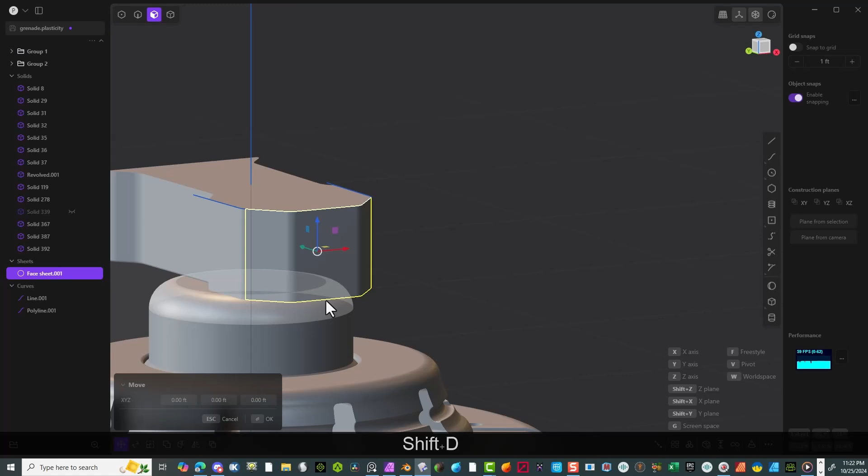Okay, so now I'm going to select these little sections here with the face selection around this whole thing. I'm going to do a Shift D, make a copy of that. And then I'm going to scale this down. So bring it down and a little bit toward the X. And I think that looks good. Just pull it out a little bit with the G key. And then we're going to actually create a thickness to this.

All right, so now I'm extruding this with the E key basically. And I'm going to go to the top view and I'm making sure I actually have the F key selected and down the center of this and pull it straight out. This way the line goes exactly straight. As you pull it out, make sure it's straight. And then let go. And now we created the shape. Hit the OK. But first, I'm going to do these sides first, this way these are done properly.

I missed one side over here, so I'm going to pull this out as well. Plus, now hit OK. All right, now we can do the top sections. We first got to get all the sides done always first. And let's pull this out on the plus. This time we're actually going to do a chamfer, give a little different design inside. I'm going to select this object and this object, and I'm going to hit the Q key and basically cut that section out.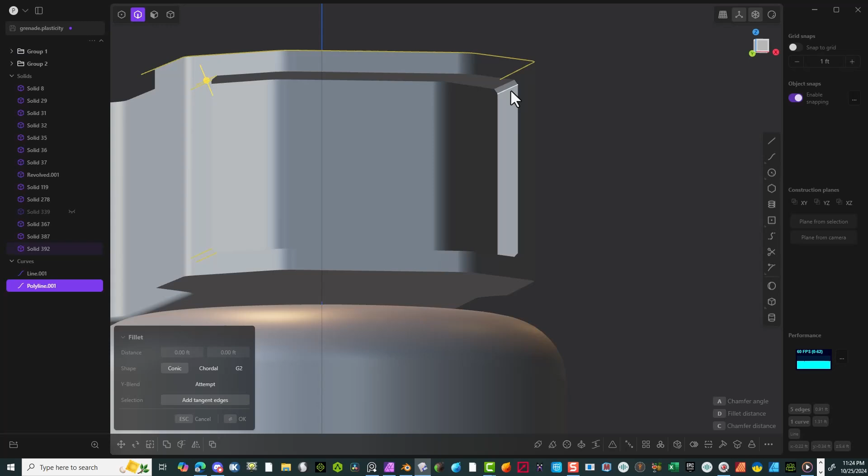All right, so I'm going to select these inner sections here, these 4 sections, not the one on top, but the inner pieces. So I got to deselect that one. And those 2 pieces there. So deselect that. And we got those 4 selections now selected. And I had the bottom one accidentally, but that's okay.

Just going to pull this out a little bit on the plus. There we go. And now it's done. A little bit more. I think that's going to look nice right about there. And again, it did the nice slide around the edge there. Hit the OK.

All right, so now I'm going to fix this edge here, but we got a little bit of a fillet there. So I need to get rid of that first before I can actually clean this up a little bit. I want to make it a little bit wider of a bevel. So let's go both sides and just delete those edges that are in there. Again, it's hard to see these, but there are some fillets there. Always look for those things if you're having problems trying to do a fillet and it just won't work. A lot of times it's because you got 2 sections in there. So now this one worked.

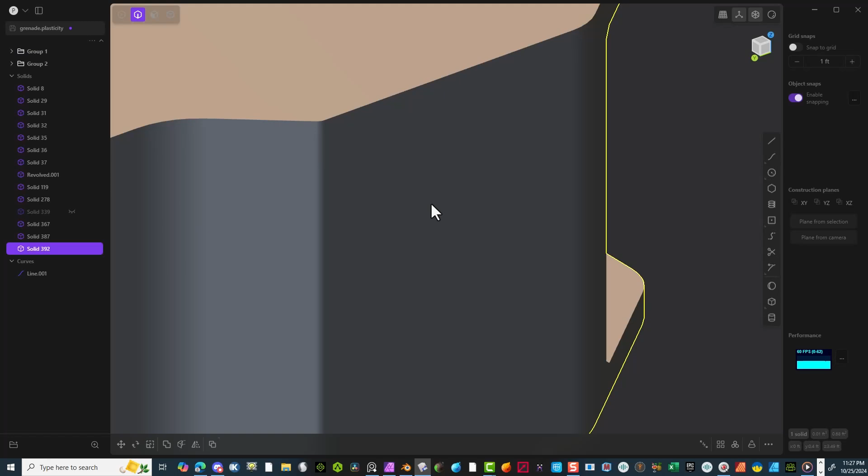So I'm going to copy this, Control C. And then I'm going to go over to the other side and do the same exact thing. So again, select the line. Well, actually, it was already selected, so it did what it needed to do. Cool. So we got both of those done. Didn't realize I had that shifted on 2 objects.

Now there's an issue right here. This hard line to a curvature. I need to select these sections here, where I created the actual fillet. I need to go in there and manually do this again. I should not have done these fillets earlier on. Again, things that you learn as you go. So select this with the Shift key. Make sure we get all of them. So fast forwarding through this.

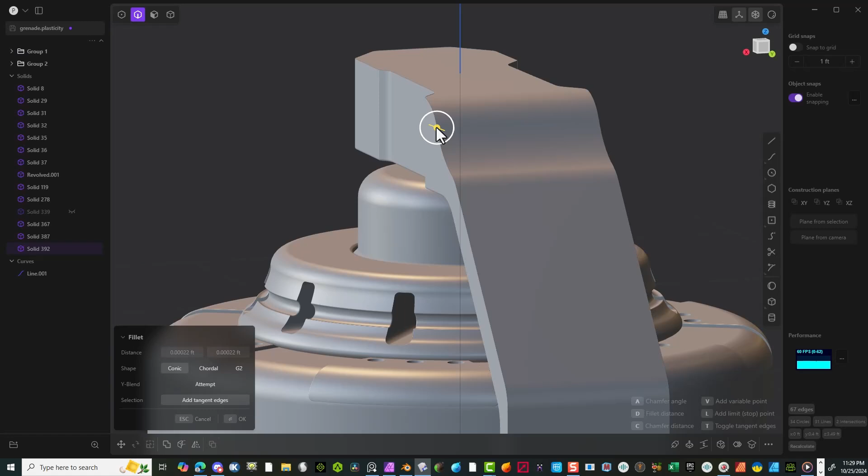All right, so now I got them all selected. I'm going to hit the Delete key and basically delete all these. Now I'm going to go in and select the line again and see if it selects it all. So that means I got them all. Now we can pull this out on the plus, so get a little bit of a nice smooth fillet on the edge of this. This way it doesn't look so harsh on the edges. And like I said, it's very, very minute. 0.003 looks good. All right, cool.

All right, so now I'm going to select the desk section here. And I'm going to go to the top and add a support holder on top here. So I've pulled that out, and I'm using the G key to pull this up now. And I'm going to select the face here, and pull this into the actual object. So pull it in, and hit the OK. Cool. Now I'm going to select this object here and this object and hit the Q, but keep tool. I want to make sure I keep that section there.

So let's select this line and scale it down. So that size looks good there. I'm going to select this edge and do a fillet on it, not too round, but just a little bit. And I'm going to hit the OK. And now I'm going to select the object selection, hit the G key, and move this down into the space, something like that.

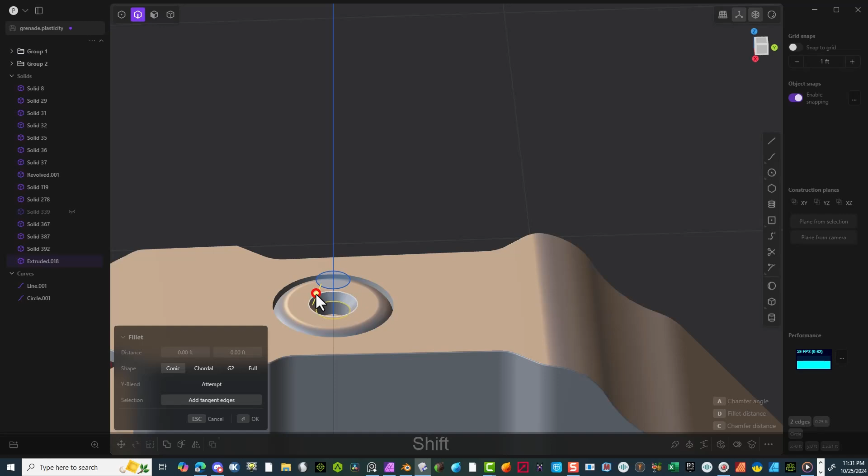Hit OK. Now let's go ahead and select the face selection and select this top small little circle. And we're going to pull this into the actual top piece here. And again, I'm going to select the object selection, select that, and then select this and hit the Q and hit OK. And now we select the line here and pull this out with a fillet, or a chamfer actually. And I'm going to select both of these sections as well and do a fillet on those. Cool. So hit OK. And now select the line and delete it.

And we could also modify this inner piece here. Just pull this out with another fillet. About there. Looks good. Hit OK.

All right, so now I'm going to use the object selection and select the top piece here. I'm going to move this into the space. So hit the G key and let's bring it into the round section here. I'm going to create this to connect into this. Hit the OK. And again, I'm going to move this down again. So G key, move this into the space like before.

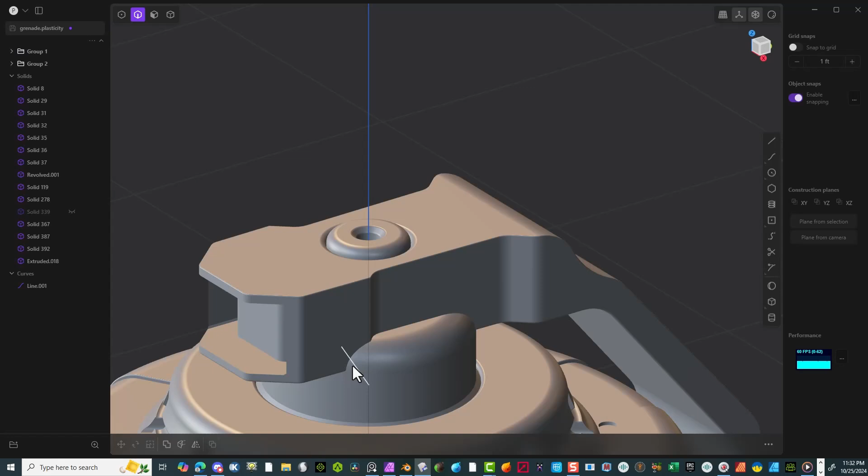Hit the OK. And now I'm going to take this object first. So see what I'm doing here. I'm going to hit that first and that second. And I'm going to keep tool and go ahead and hit OK for the boolean of that. And again, I'm just trying to get it so it looks like it fits into this space. So now I can select this edge here and just pull this out a little bit.

All right, so now I need to adjust this little part here. So select the object again and select this piece here and just bring it down with the G key. It didn't get moved with the other part, so let's bring it down on the Z axis, right about there. Hit the OK.

All right, so I want to go to the side view here. I need to create basically a pin section here. So go to the right side. Let's go ahead and pull out a rectangle and place it right there. And we're going to modify this a little bit. So I'm going to move this out a little bit so it's away from the edge. And then I'm going to adjust this. So again, I'm going to pull this out first with the face selection, bring it into the space, something like that.

And it has to be some type of device to pull out the thing so we can actually use the grenade properly. Hit the OK. I'm going to adjust the top piece here. So select these two lines here, this edge and this edge. This time we're actually going to do a chamfer. So let's pull this out with a chamfer, something like that. Hit the OK. And the bottom, a little bit of a chamfer, or actually we'll do a fillet here, a little bit different.

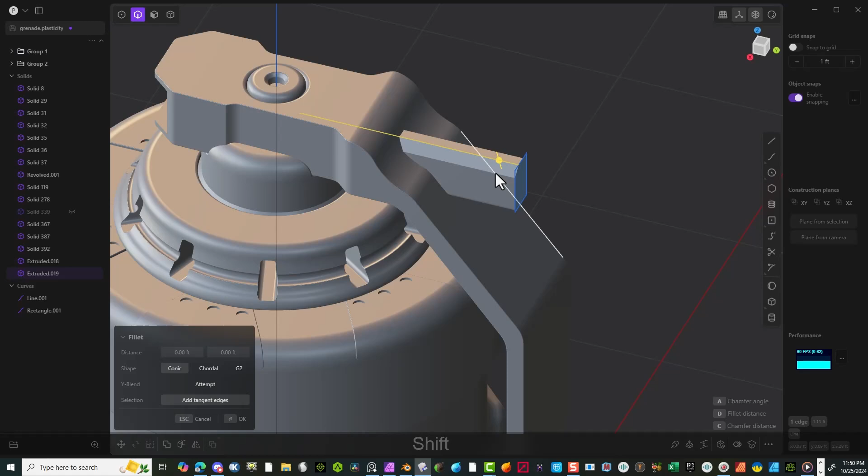And then I'm going to select these 4 sections here. Go to the side and select each of these. And again, I'm adding a little bit of fillet here. So let's get a little closer, pull this out on the plus, hit the OK. All right, that's looking good. So select this section here and delete it.

All right, so now I'm going to select this section and this section and hit the Q. And I'm also going to keep tool and say OK. And I also need to select that object and this object and again hit Q. And again, keep tool, hit OK. So that way it kind of goes into both forms.

One thing I want to do here is I want to add a little bit of an edge here. So again, a little bit of a fillet there, so it looks like a separate part. One thing I want to do is I want to round this tip of this piece a little bit better. I just think it's too sharp for my design.

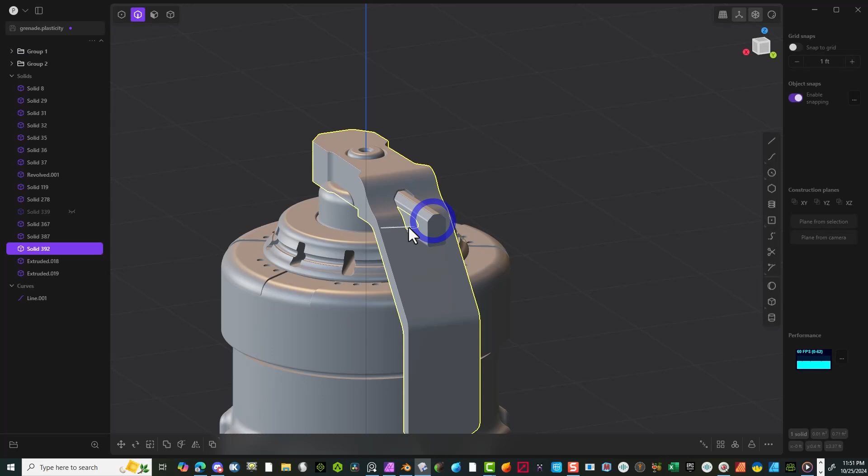I'm going to go to the side view. I'm going to use the line tool, or actually I'm going to use this to cut the tip of this thing is what the goal is here. I want to make that more rounded on the tip. So I'm going to go and select this object and select this cutter and we'll cut it right there. And that way we have a nice rounded edge. So select those and delete them, both of them. All right, that looks nice.

And I'm going to select both of these parts again and hit QQ so they can reconnect each other. Simple to do. All right, so select the line. Let's go and delete this. All right, so let's select the face here. All three sections. And I'm going to just pull it in basically to get a little bit more roundness to it. That looks better.

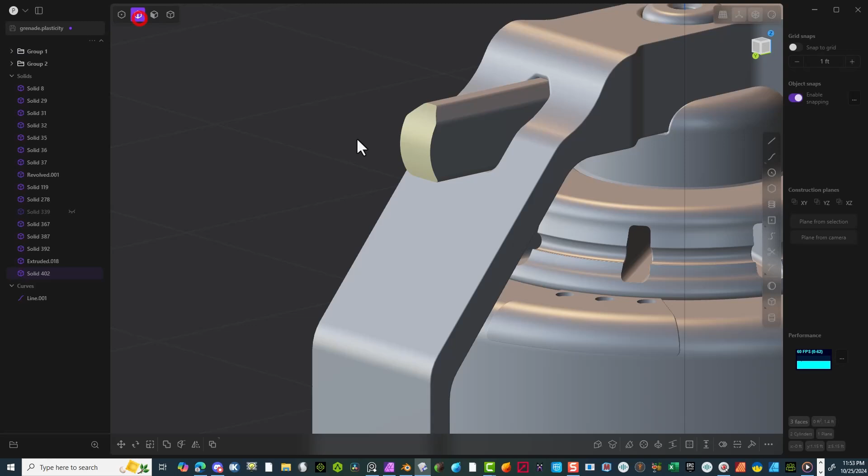Select OK. So I'll select the line tool now and select this whole thing with the Alt key and just pull this out on the plus. A nice little fillet on the edge there to make it more smooth. All right, that's looking really good.

Now let's go ahead and select the circle and we're going to pull this out right there. Not too big. And we're going to use this to cut into this object. So select it and then hit the cutter. Select the cutter and then cut through. Hit OK. Now we can delete that piece. Great. Now select the line tool and let's delete that.

Right, so we still need to create the hook, the section that we pull the actual pin out with. And to do that, I'm going to use the circle tool, circle line. First, we're going to go to the object and hide all this stuff. So hide all these, they're just going to be in my way. Same with these, and this one as well, so I can just focus on this pin section here.

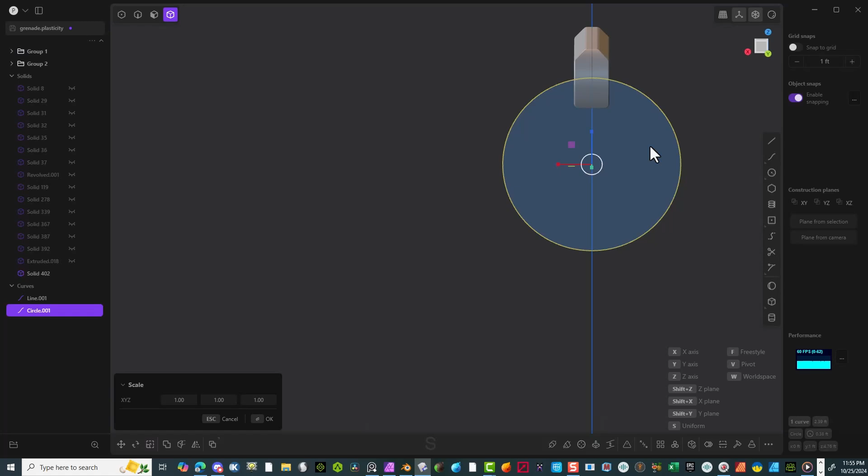I'm going to go to the side view here. Select the circle. I'm going to pull out a circle, trying to place it about there. And I'm going to hit the G key and move it into place. I want to make sure that the center of that is at the center of this spot. Hit OK. Scale it down a little bit, I think it's too big. And I'm going to move it with the G key back into space here and go back to the side view, and line this up in the center of this.

So I'm going to select the line here across just to get an understanding where the center is. Now I can select this line. And we're going to hit the F key and select the top and then center off the line here. Perfect. Now it's perfectly centered. Now go to side view. And here I'm going to create not a circle, but more of an oblong circle.

So again, I'm going to create another circle down here. And now I'm going to use the lines to connect this center to this center and this center to this center. Just like that. Now that I got all those done, we can start using the trim key. So let's select all those and these as well. There we go. Perfect. Now we can use the selection and select all these and join them with the J key. That way this will work better.

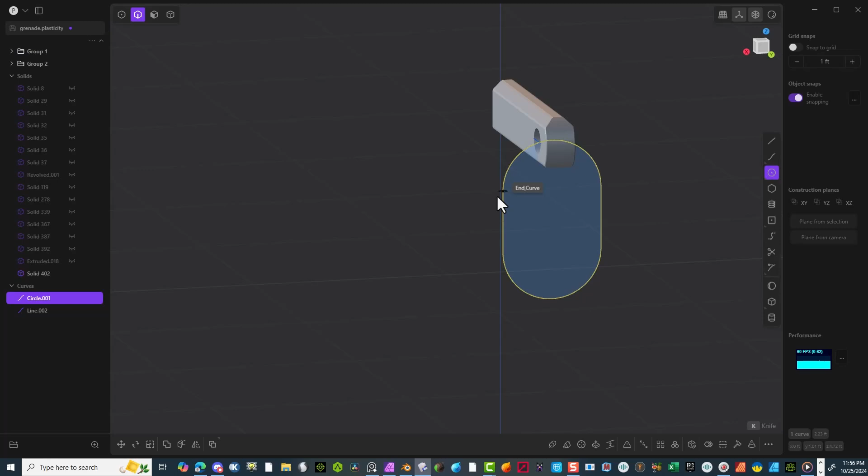And I'm going to use the circle tool again. I'm going to bring it right to the edge here and pull it out. Not too big. About there. Now I'm going to select the face selection and select the smaller circle. And I'm going to hit the sweep and select that line. There we go. Now we can select this section here and delete it, as well as the center section. So we select that as well, delete it, and the inner line, delete that as well. Yeah, I think that looks really good.

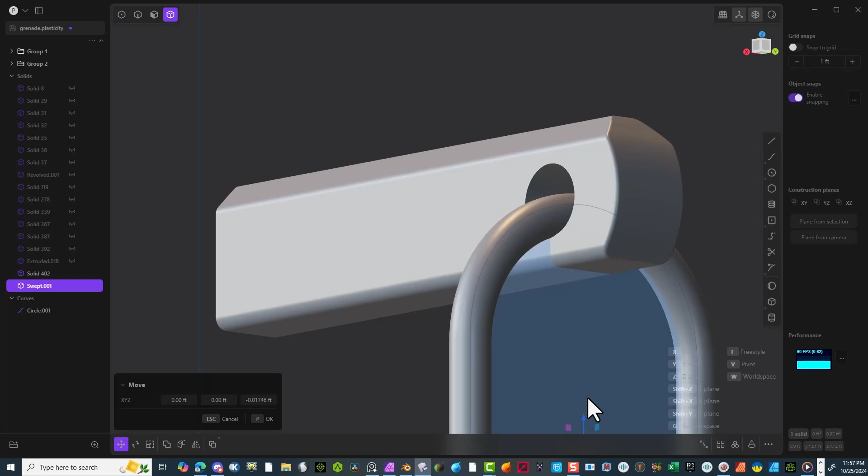I think I'm going to move this first so it's easier to select it. So hit the G key, bring it down so it's touching. And I'm going to adjust this a little bit more when I can see the other part. So right about there. All right, so I'm going to unhide everything so I can work this a little better. I must still move this up just a smidgen more. Make sure it is past that edge. I don't want it to be digging into that at all. And I'm going to unhide everything so I can see what I'm doing with the piece here. And I see it's definitely into the spot here.

So I need to go to the side view here and rotate this. So I'm going to hit R for rotate and then hit the F key. I'm going to place this right at the center of this and then bring it down to the bottom here and pull this up. I want it to lean against the very edge of this, so it looks like it has the weight of that onto the piece. So it's loose, basically. I think that conveys that look.

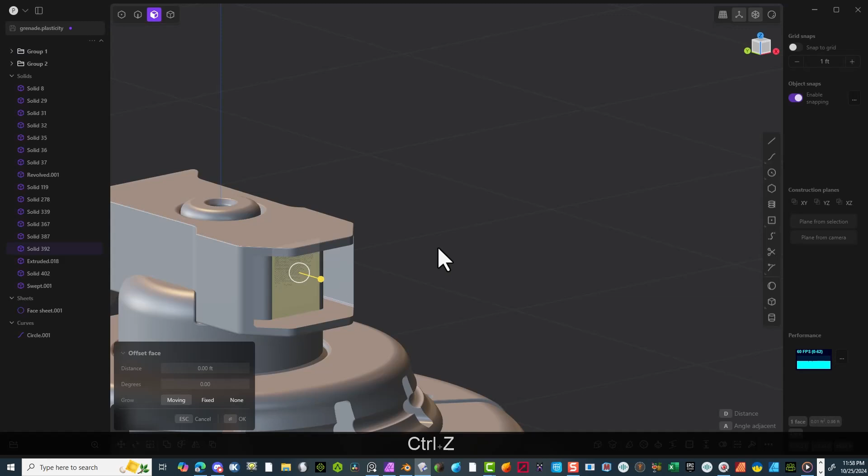All right, so another thing I want to do here is take this piece here and select it, Shift D it, and I'm going to scale this down. So bring it downward and then in a little bit. And then I'm going to say okay, and then I'm going to take the points here. But first I'm going to select it. And I'm going to select the object selection and move this back a little bit. So hit the G key, so I can maneuver this a little better.

And now I'm going to select it and extrude it. And since I already got that face, I'm going to select the line tool here and select these edges here, all four. And again, I'm going to do a fillet there, so it's nice and rounded. All right, so pull this out a little bit more, right about there. Then I'm going to hit the object here and the other object, and again, hit the Q key, and we're going to delete that out. Okay, this is pretty much it for this grenade that I created. I'm going to also do a little fillet here, and that's it for that.